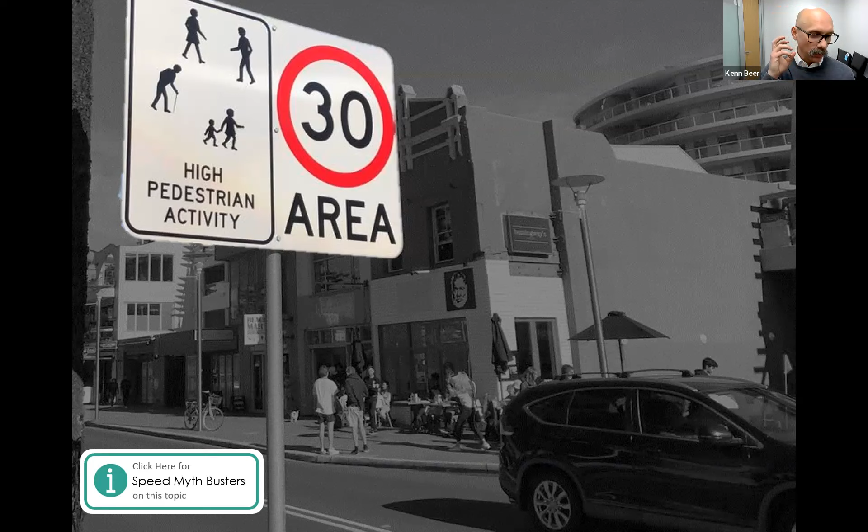Anyway, so back to speed now. Max was talking a little bit about some speed fundamentals in terms of the impact forces at different speeds, but also reaction time, braking distance, and the power relationship between speed and injuries, so that it's not a linear relationship.

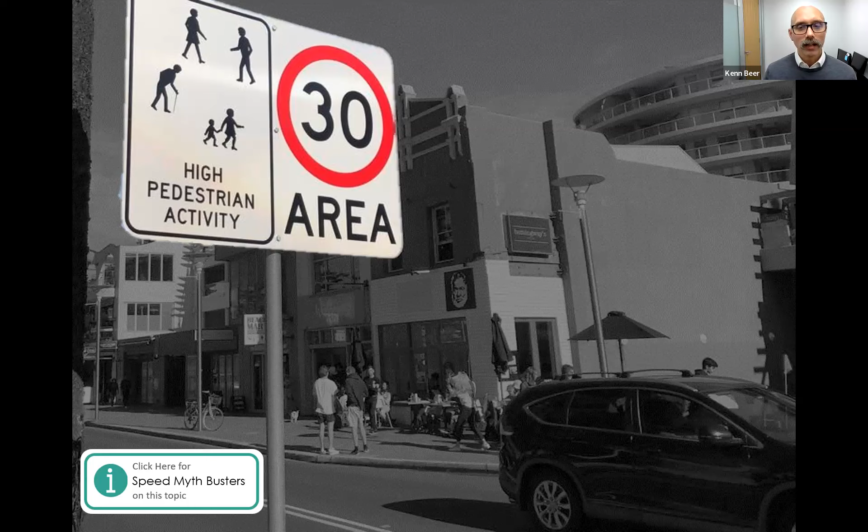We know that speed is hugely important, but it's very, very challenging, especially if we're talking speed limits. Using infrastructure like local area traffic management, or other features on the network that have physical characteristics so that people slow down as they approach these areas by themselves - it's their choice to do that - they are very effective. Speed limits can be effective too, but they come with a whole lot of challenges, and we have a very big reliance on the drivers themselves actually complying.

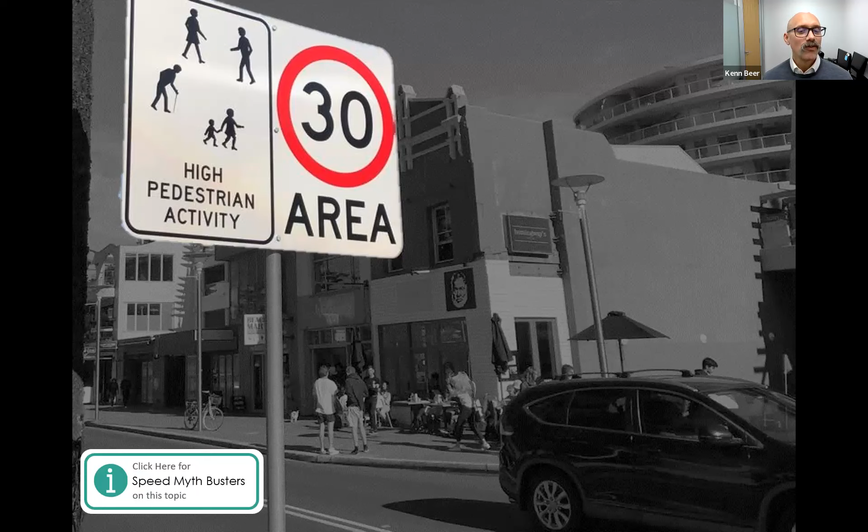If you put a speed hump in a road, you can have whatever speed limit you want, as long as the driver knows it's there, knows it's coming up and is fully aware of it, they will slow down. So it's very, very effective from that perspective.

So we know that you can achieve safe travel speeds through infrastructure and or speed limits. I encourage any way you possibly can to use infrastructure as much as you can, because of the challenges that come with speed limits. Speed limits are very important, but we need to be really coordinated and targeted about how we go about speed limit management.

I think we've completely got it wrong in Australia in terms of speed limit management in the past, and we need a reset. But you're taking a whole community on board, you're taking the politics into account, you're taking all sorts of other very complex things, and they intertwine, and it's really, really challenging.

I had the pleasure, or the displeasure maybe, of managing speed zones in Victoria for a handful of years, and all of speed limit policy and everything like that, and have worked on speed zone policies across Australia. And yeah, it's very complicated. It sounds easy, but the more you get into it, it just becomes incredibly complex.

But happy to share lots and lots of research and documentation, amazing studies, if anybody's interested in that level of holistic change in speed zoning and speed zoning practices.

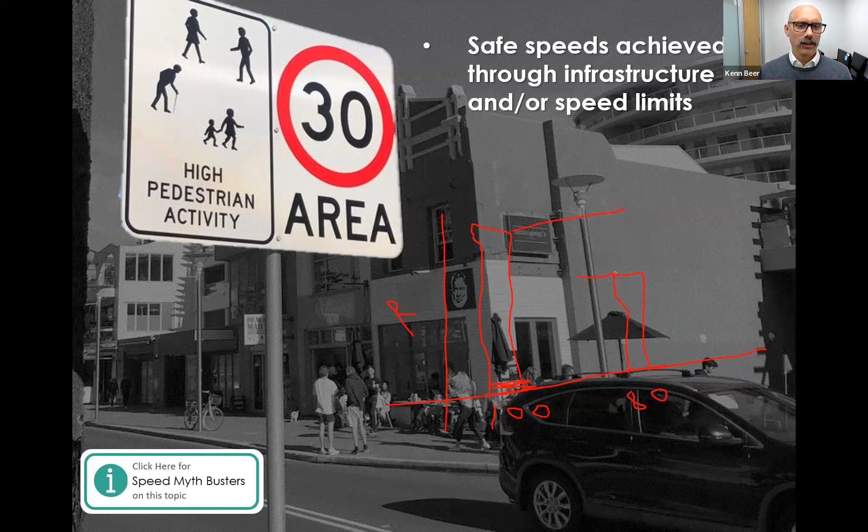Okay, but the issue we have a lot with speed zones and speed limiting is that we talk to the individuals like they're a collective. And we say, oh, we're reducing the speed limit on this road from 100 to 80 for safety, for your safety. They're like, what? I've been driving this road for 40 years and I've never had an issue. What are you on about? And I don't blame them at all. That's very low risk to very low risk for them as an individual.

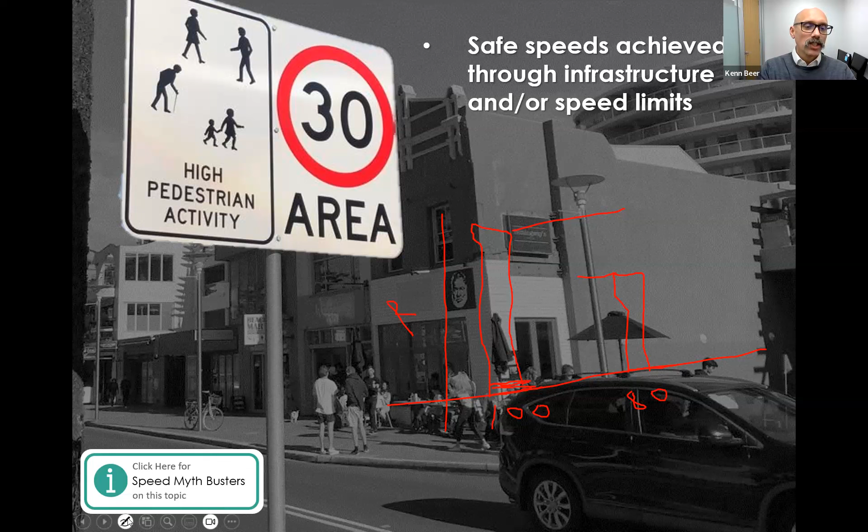So anyway, I think we need to think about the way we talk about speed zone changes. The science and the theory on it is unquestionable that a lower speed limit on a road improves safety. I was rewriting the Austroads Guide to Road Safety Part 3, which is speed limits and speed management, and I just put in there 30 studies—before and after—of roads where the speed limit had been dropped and safety had improved, and roads where the speed limit had been increased and death and serious injury increased. There's so much information out there to back this up, but it comes with those challenges.

Okay, so I think, Marissa, is it? I see chat activity happening. Yeah, we have a couple comments or questions.

The latest version of the speed zoning guidelines in Victoria has introduced risk rating as a reason to reduce speed limits on open roads. So this is a much better way to move, and certainly a risk rating system like iRAP, this infrastructure risk rating, or even utilizing AusRAP, ANRAM, any of these ways to assess infrastructure for risk, and then apply appropriate speeds, is very good.

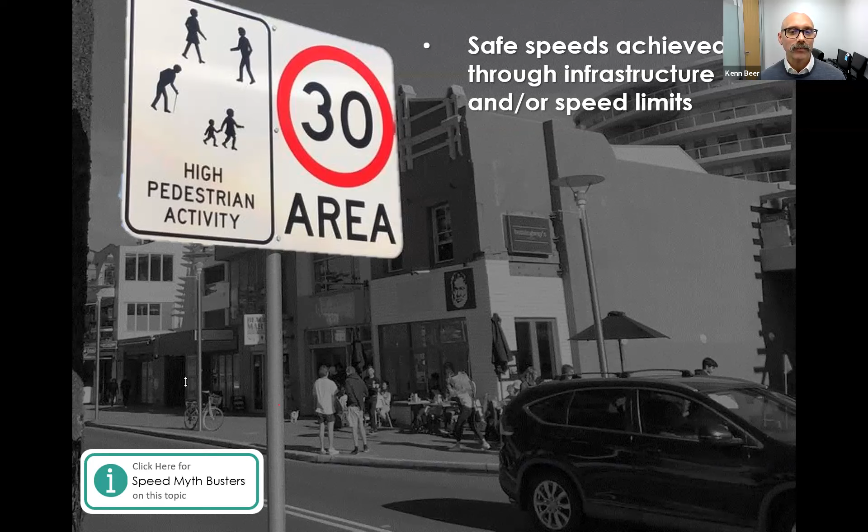But it's a fair use of my argument back against me, so well played. The basics around theoretically managing speed zones in an area is to have a default low speed limit and look at the roads that have appropriate infrastructure and raise the speed on them, and that should go across all traffic volumes. Naturally, you'll put your better infrastructure into the roads with higher traffic volumes. But yeah, boiling down major complexity to simple statements.

Anyway. Thanks, Kenn. We have a comment.

Freeways are supposed to be safer roads, but paradoxically also have more crashes - obviously a factor of high volumes, thus the collective impact. Yeah, and that's right. This is a nice lead into how we do a safe system assessment, because we factor exposure in with likelihood and severity, and we come out with risk levels at a collective level. I'll talk more about that, but Andrew's hit the nail on the head there.

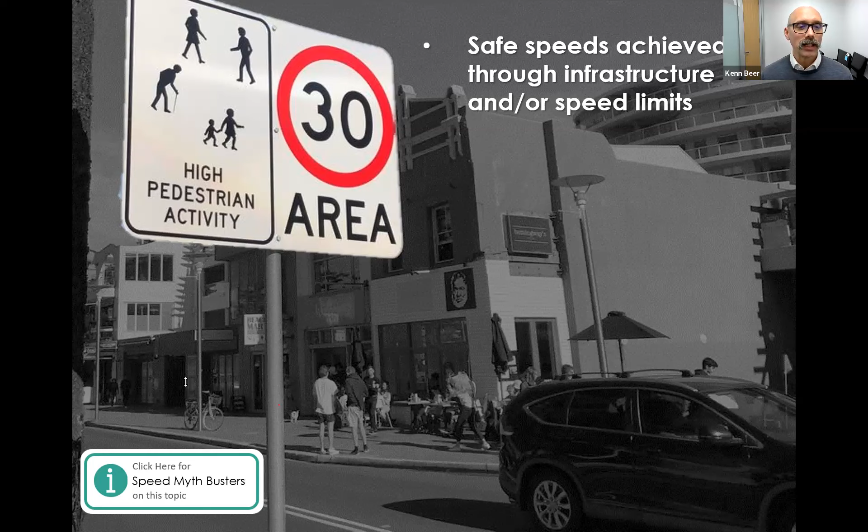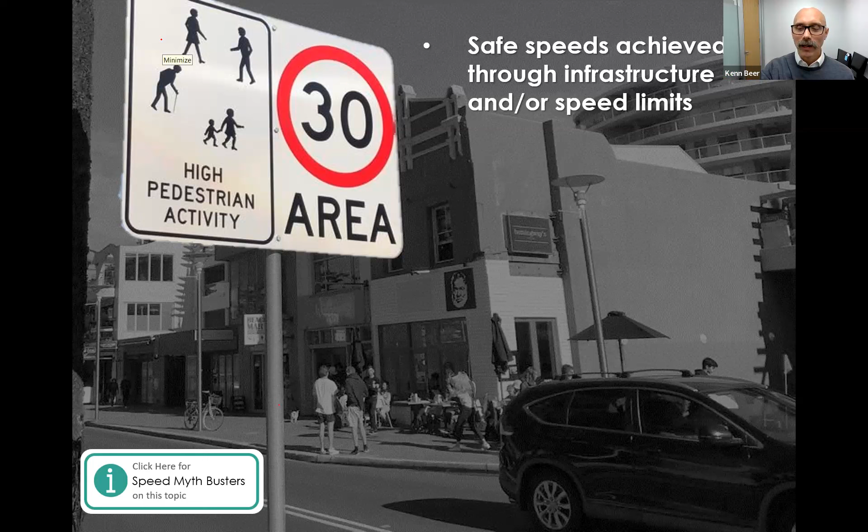And yes, Ross is madly working hard to try to get us safer speed zoning across Victoria, and yeah, we're making progress. I better keep moving. Thanks.

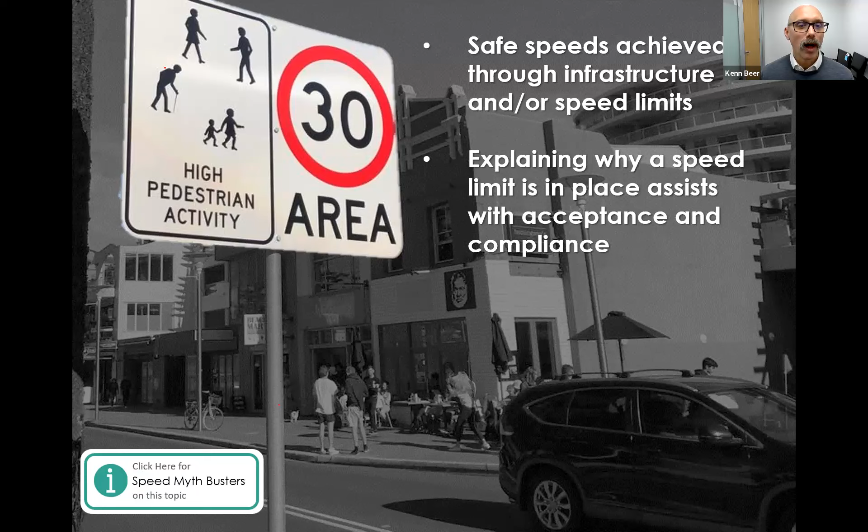Just a couple of little things I think are interesting. Generally explaining why a speed limit is in place assists with acceptance and compliance, especially around vulnerable road users. People will grumble, they'll always grumble at it, but when it's very clear why a speed zone is in place, it's better accepted.

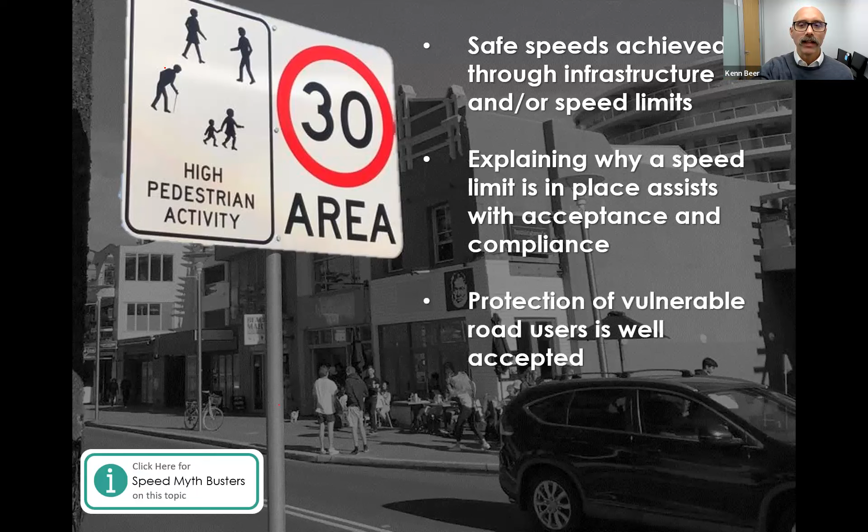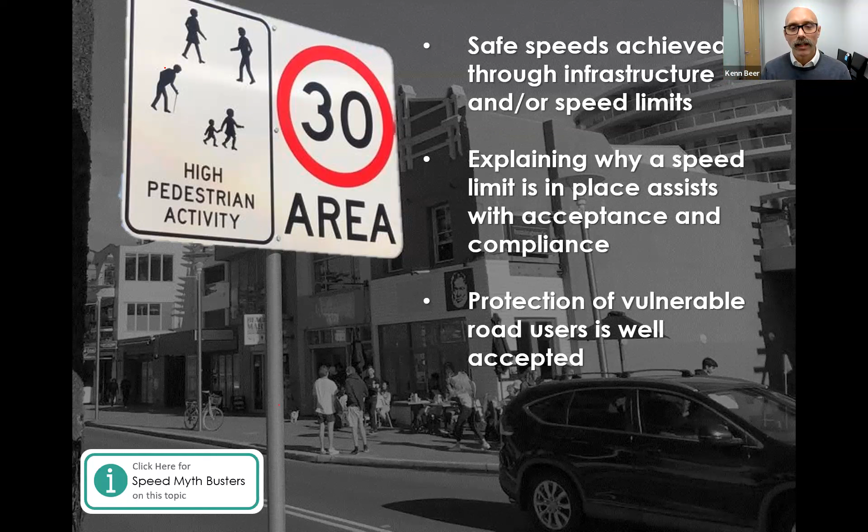And vulnerable road users, as I said. I actually think speed zoning in urban areas, we have a lot more ability to make changes with good justification around livability, increasing active transport, health impacts, noise, all sorts of good things - there's a lot to play with. Rural areas, it's more this safety versus mobility aspect, and I'm always trying to throw in other factors, be it fuel consumption and resulting tailpipe emissions, protection of wildlife, noise again, you can sometimes latch onto. So try to look for more levers.

Variable speed zones, though, for me, should be increasing and playing more of a role, because I see them as a way to start accepting lower speed zones, because it's trying to tailor it at a specific time of day and time of risk. I said time of day, but that's because there was risk at that time of day more than at other times.

But certainly the rural intersection speed limiting - it's got more names than any infrastructure I've ever heard, so side road activated speeds or the like - is where you've got the main road at a certain speed, but if a car's coming in on the side road, it'll trigger a lower speed limit on the main road. That to me is a beautiful way to get people more accepting of some of these lower speed limits, and it's good use of technology. We'd like to see that spread more across Australia, and it might be that in your safe system assessments you're recommending these if you're in a jurisdiction that hasn't used this, and you can push people into trialing some things and a bit of innovation.

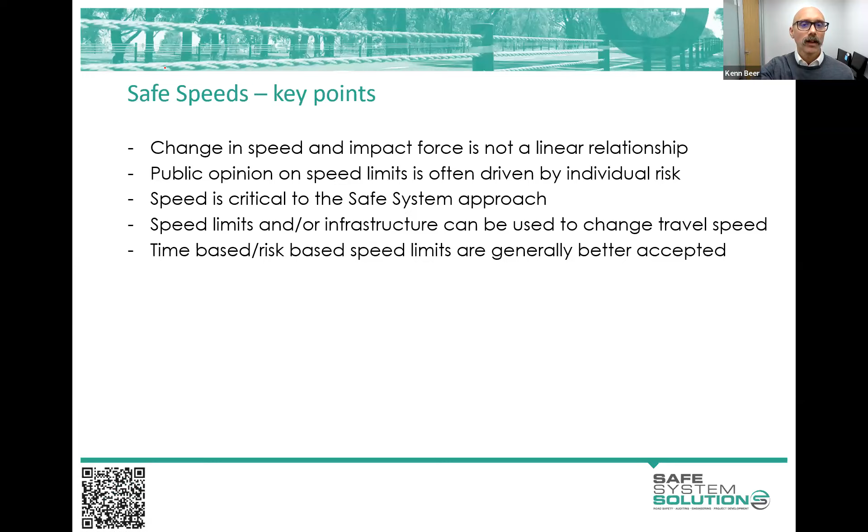And there's the key points in there which you can look at in your own time, because you've got the PDF notes which you can download from the learning management system.

Right. Now, let's give a prize if somebody can give me the international definition of risk - the international formula for risk. I wonder if anybody's got that at their fingertips.

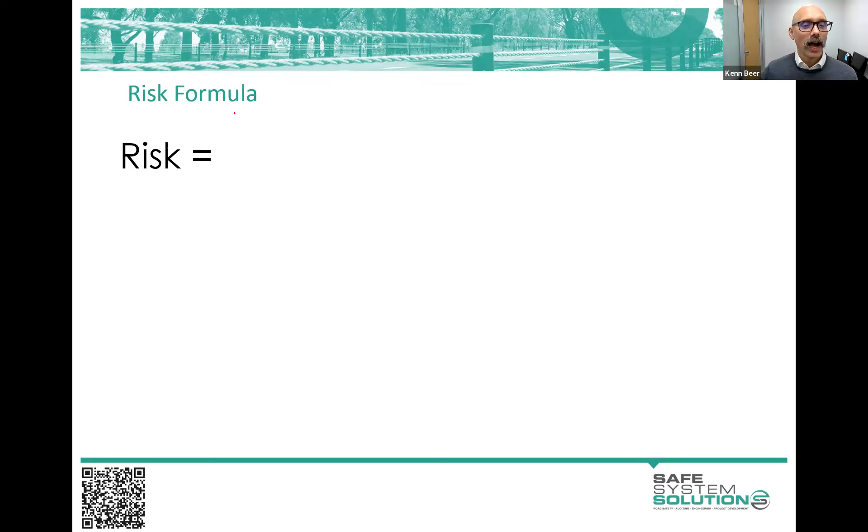Pause and see - Andrew's gone next level and given us the safe system assessment definition formula for risk. Probability times severity will do as that one. So you better give a prize for two here - likelihood times consequence, but I'll also take exposure times likelihood times consequence, or likelihood times severity, or probability times severity.

So it's what is the chance a crash is going to happen and how bad is it going to be, right? But this is also like economic risk - what is the risk of recession? Well, the risk of recession is what is the chance we go into recession, and then what depth of recession are we going to go into? That's the risk of recession.

So recession's a bad one to use there because it has a particular - or health risk. What's the chance of a disease, and then how bad is that disease when it goes out there? Is everybody just going to get a light cold, or are we going to have large swathes of our population dying? That's the risk of that disease.

So we use that in road safety. We've used it for a long time. We've said, what's the chance of a crash? And then when it does happen, what's the severity of that going to be? We've often, as an industry, really just focused on the likelihood one in road safety.

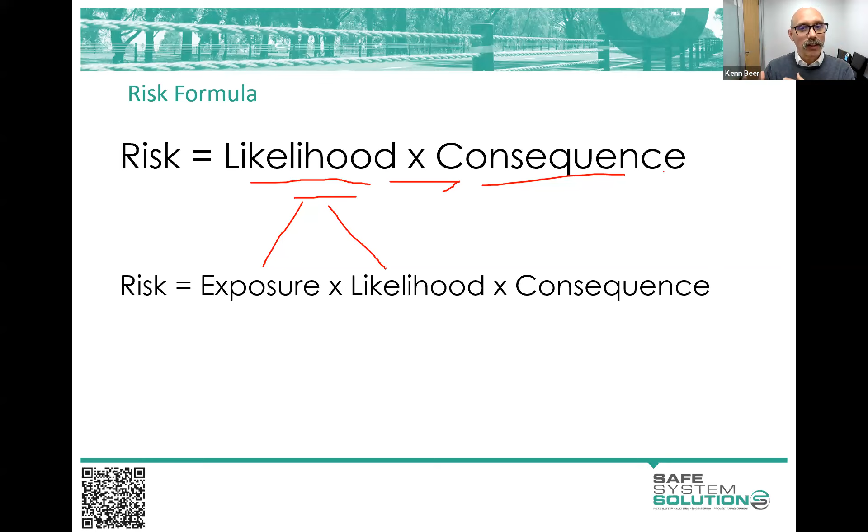And consequence stays as consequence, because you're putting yourself in a mindset that the crash now is happening and we've got to work out how bad it's going to be. So to do a safe system assessment, we actually quantify the exposure to crashes, the likelihood of crashes, and the severity, the consequence of the crash. We put a number to it and we get some numbers out here.

And that's what we're going to be building to, and then we're going to get you out there looking at the road environment and analysing - well, what's the exposure to crashes? How many road users are exposed to crashes here? And then what's the chance that they're going to crash? And then how bad are they - what's the severity of injury when that crash happens?

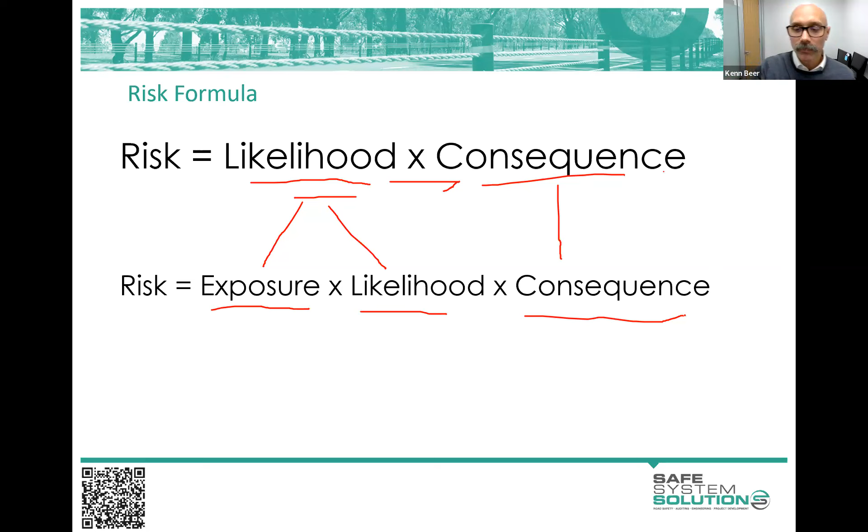So just to help you get this clear in your mind - exposure, likelihood, and severity - I'll show some treatment examples where we look at what's influencing the exposure to crashes, or the likelihood of crashes, or the severity of crashes. Take note here, because your assignment at the end of this module, we're going to ask you to look at a bit of the road network and think about what's influencing exposure to crashes, what's influencing the likelihood of crashes, and what's influencing the severity of crashes.

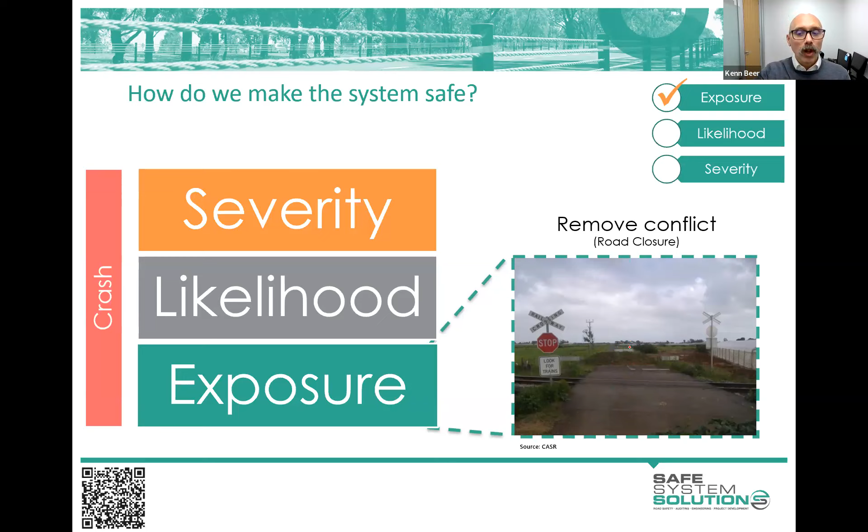So closing a road, an intersection or the like, you eliminate that exposure. But likewise, if you physically separate - and I'm talking about physical separation here, not just a white line or a bit of curb - say we've got cyclists and pedestrians physically separated from an elevated structure with all the cars, they're not exposed to crashes with passenger vehicles. They might be exposed to crashes between each other, like cyclist to pedestrian, but not vehicle to cyclist or pedestrian crashes. So those are examples of where we've addressed exposure.

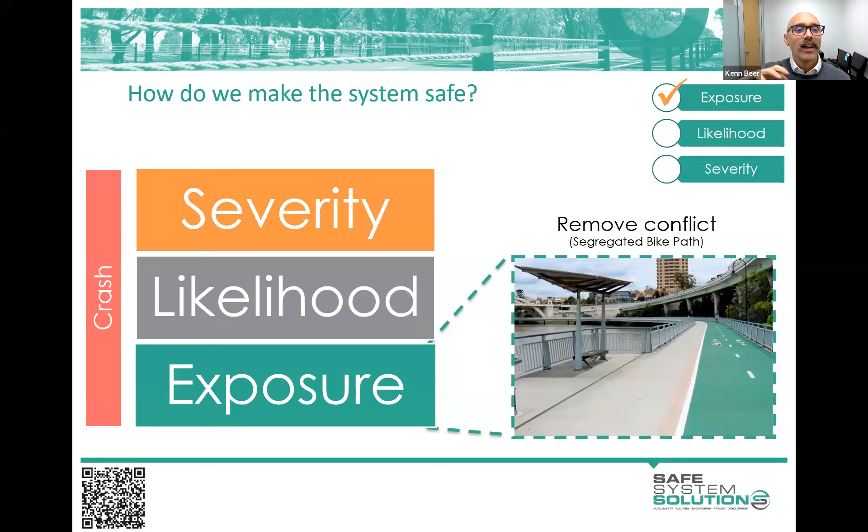Now, likelihood of crash is influenced by a lot of stuff we've done for a long time in road safety, like line marking, sealed shoulders, good pavement, lighting, some newer things like wide center lines, audio tactile edge lines, RRPMs, even just good geometric alignment of a road is a likelihood factor. These are all things trying to stop people crashing in the first place. Let's do everything we can to stop people crashing.

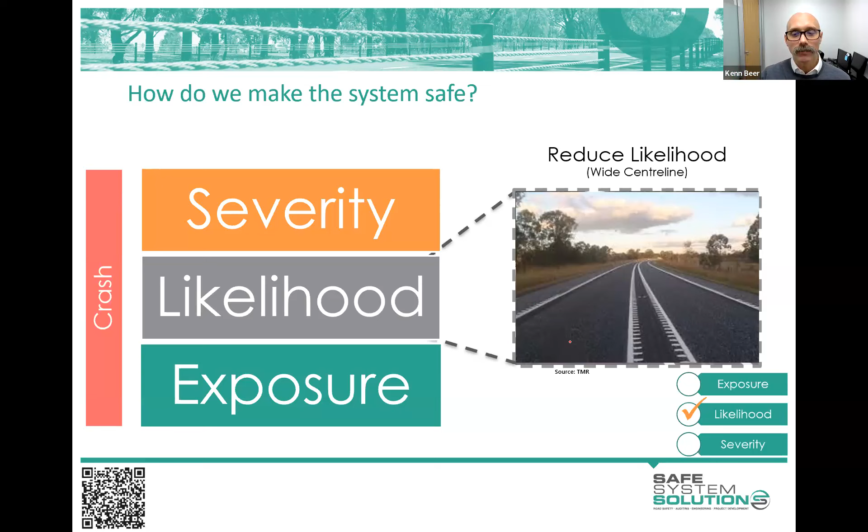Even traffic signals themselves are a likelihood factor. We reduce the likelihood of people crashing if we signalize an intersection compared to a passively controlled one, like a give way or stop sign. They're less likely to crash because they're getting a clear indication: you stop now and you go now, and vice versa. But if somebody decides not to take that advice, or misses it completely, or is distracted, or is half asleep...

...the severity of the incident is just going to be as bad as it was before, because we've got the same speed and the same crash angles - the severity is just as bad. Now there will be some cases where the severity is down because they've slammed on the brakes late and go into the intersection slower, but we still have abundant capability for high severity crashes to occur at these signalized intersections. The feature of the signals itself does reduce the chance of crash.

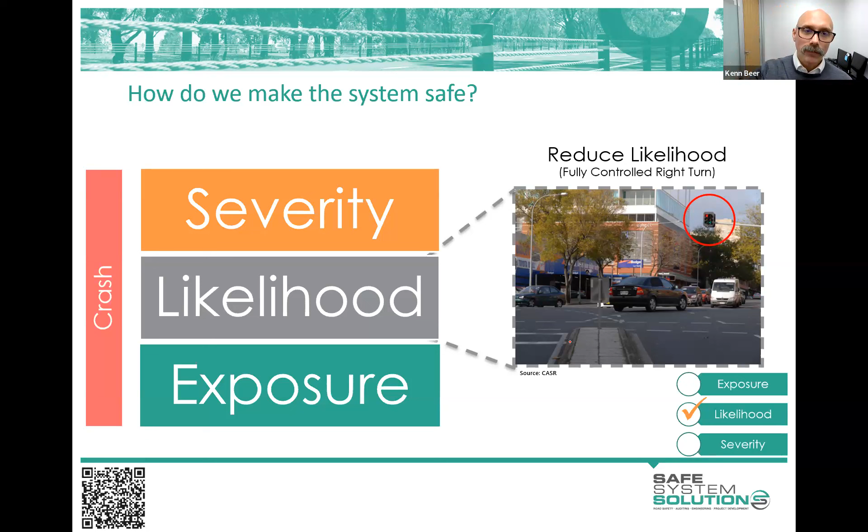Then we talk about severity. We only have a small handful of things that can actually substantially change the severity of crashes, because we're down to the physics and biomechanics of injury here. What we've got to play with from a road design and management perspective is the speed of vehicles, the angle of impact if we're talking vehicle-to-vehicle crashes - the angles they hit and the types of crashes that occur.

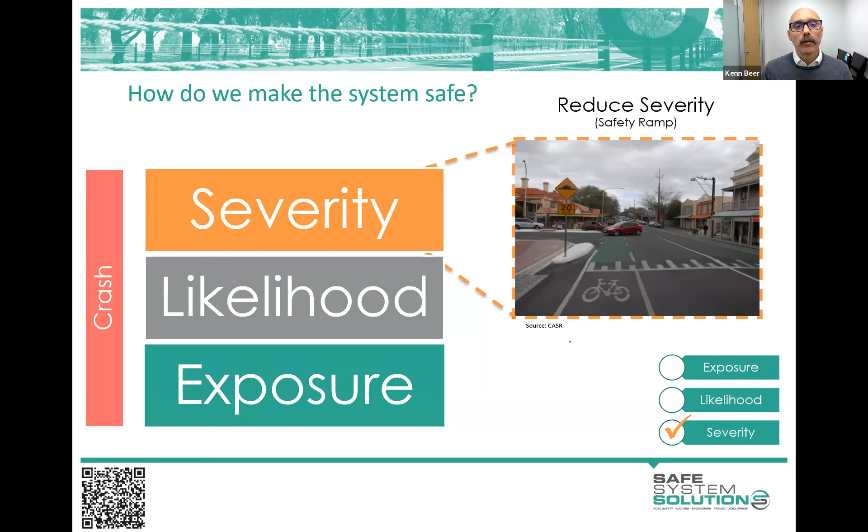So we've got speeds, angles, and the types of users you're letting into these areas. If we have pedestrians, the severity will be much higher compared to vehicles, so there's that sort of interplay. Sometimes we also have the ability to implement features that manage energy, and that's particularly what they're designed for, such as barrier systems, crash cushions, impact attenuators, cushioning devices.

Barrier systems are a really good example of a severity reduction device, because if a vehicle leaves their lane and hits this barrier system, that is a crash, but we know the severity of that crash will be low. Without the barrier system there's a fair chance they would go into the other lane - there wouldn't be any other vehicle, they'd come back, they'd drive on, there wouldn't be any crash. So actually the installation of a barrier system increases the likelihood of crashes, but the severity of any crashes happening is so much lower because those products are designed to manage that energy.

So you can see, we have the ability to influence exposure, likelihood, severity, or combinations of all of it by choices we make with the design and management of the transport system. We can take human behavior almost out of the equation, because there are ways we can redesign the road for the bulk of the death and serious injury that occurs. There are practical challenges with funding and getting community on board, but from a pure design, engineering and management perspective, we can do a huge amount in reducing death and serious injury.

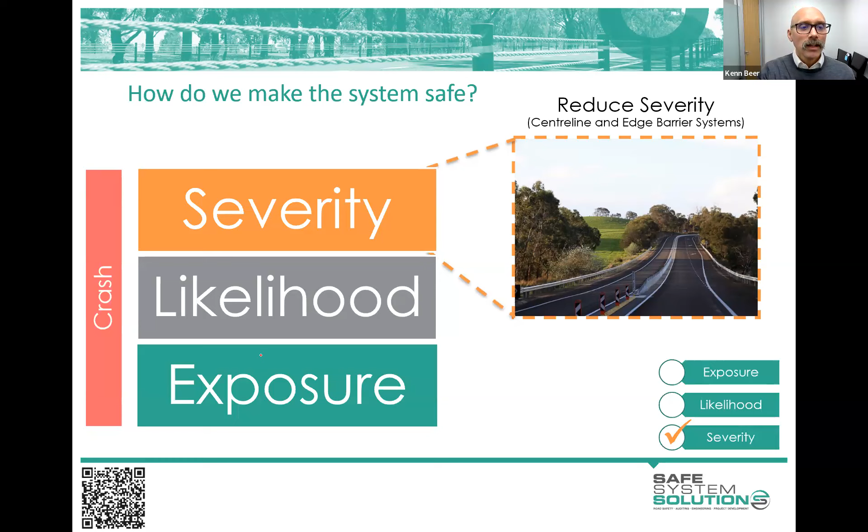We have one question at the moment. Could a motorist miss a safety ramp just as easily as a traffic signal, while also introducing a vehicle stability issue if hit at speed?

Yeah, that's a really important question, and it's asked by a lot of people associated with raised platforms and the like. It's very much been proven that that is not the case, and people do not miss raised platforms. There's some requirements though - they need to be marked well, they need to be lit, and they need to have some advanced warning signage if you want to supplement. But the evaluations done on raised platforms in lots of different road environments show they are extremely successful, and people are not hitting them at speed.

Well, anybody who's hitting it at speed seems to be fully aware that they're going to hit it at speed. So it's rare that somebody has decided to go - I mean, we're talking like police chase type scenarios. But it's a good question to ask, and I'll show you a few things around that a little bit later in this module. So thanks, good question.

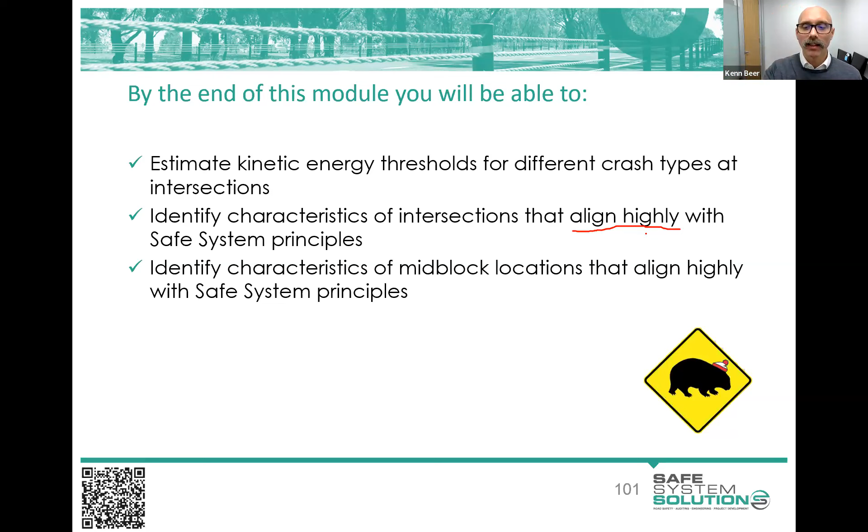Now, conflict points - if you draw a line of travel path and two road users cross that travel path, that's the point where the crash can happen. There are conflict points, okay?

But there's another reason why risk goes up at intersections, and that's associated with secondary crashes and avoiding crashes. So as a vehicle approaches an intersection, another vehicle could enter that intersection, and then the vehicle will try to avoid, as you naturally would. If you're driving along and approaching an intersection and somebody pulls out, you're going to try to avoid if you can - and then vehicles leave the road.

And they may clip the other vehicle, so you've got these secondary crashes that are occurring. And we also put point source hazards all around intersections.

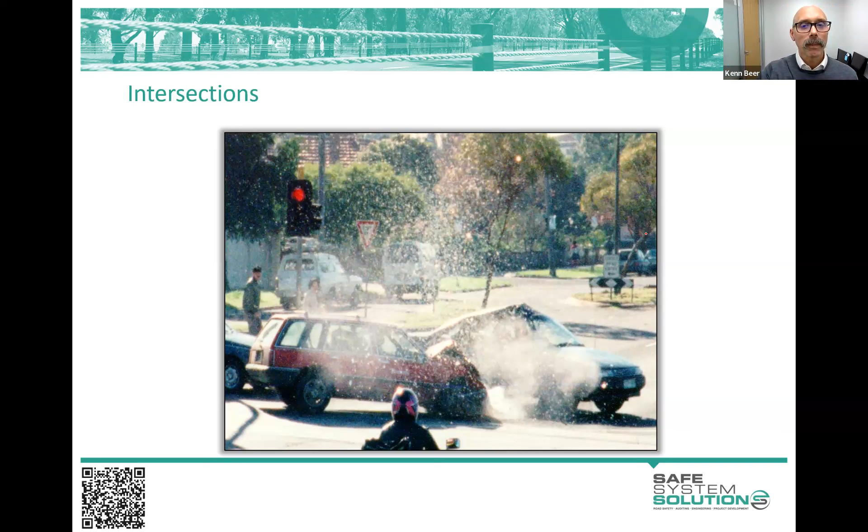Then we look at the chance of a crash through conflict points, and minimizing conflict points, maybe left in, left out, or closing off a turn or the like. And then we've got all of the severity stuff, managing the energy using speeds and angles to try to lessen the energy of any crash.

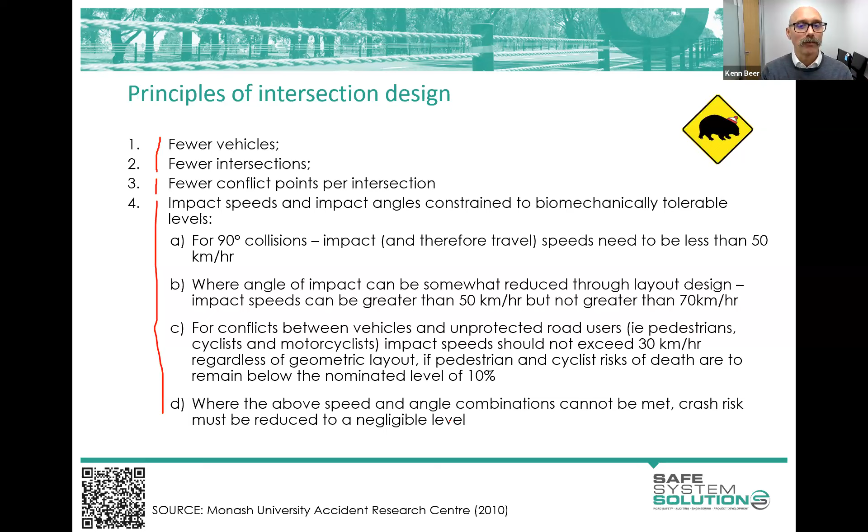You can see there that they've placed these within those safe system tolerances that Max talked about last session, and the speeds you'd expect your community to survive at in different crash types. I won't read through them all in detail because I think I've got a couple of tables which make it a little easier. But you can see there...

I'm starting here with passenger vehicle to passenger vehicle crashes, okay? So for now, we're just going to put pedestrians and cyclists aside—maybe we're thinking about rural environments here. We will talk a lot about pedestrians and cyclists at intersections and how to get our best safe system alignment there. But for passenger vehicle to passenger vehicle, we can generally have all crash types occurring where we have a speed differential of 40 kilometers an hour and expect our community to walk away from that crash, or just have minor injuries—we don't want it to happen, but it's generally survivable.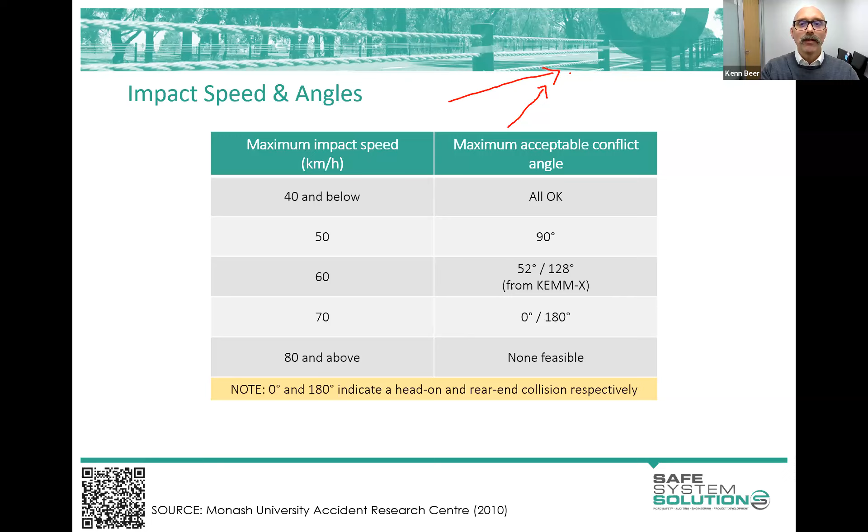And it gets up to that 50 kilometers per hour for that right-angle impact. If you get more angle on the crash, you can go up to about 60 kilometers per hour where we're still generally thinking it's quite survivable. So if you can have your crashes occurring at these angles, okay, a lot of the energy is dissipated out into the environment because the vehicles kind of bounce off each other a bit, and it's a more survivable crash, up to around 60 kilometers per hour for that.

70 for your head-ons, and 80 is really talked about as not feasible—you cannot operate an intersection with an 80 kilometer per hour delta V.

And it's important that I talk about delta V, which is change in velocity, because you can operate an intersection at very high speed if you want, but you need to accelerate vehicles so that their differential speed is within tolerable ranges. An easy example of that is like an on-ramp or something like that—you accelerate the vehicle up. So if they were to crash there, it can happen at 100 kilometers an hour, it can happen at 300 kilometers an hour, they can crash into each other—the transfer of energy in that initial incident is not enough to cause death or serious injury.

Now, if it's high speed, you've got to think about secondary crashes here, because people are going to run off the road, and then we're into major energy territory. But the actual initial crash is within tolerable levels.

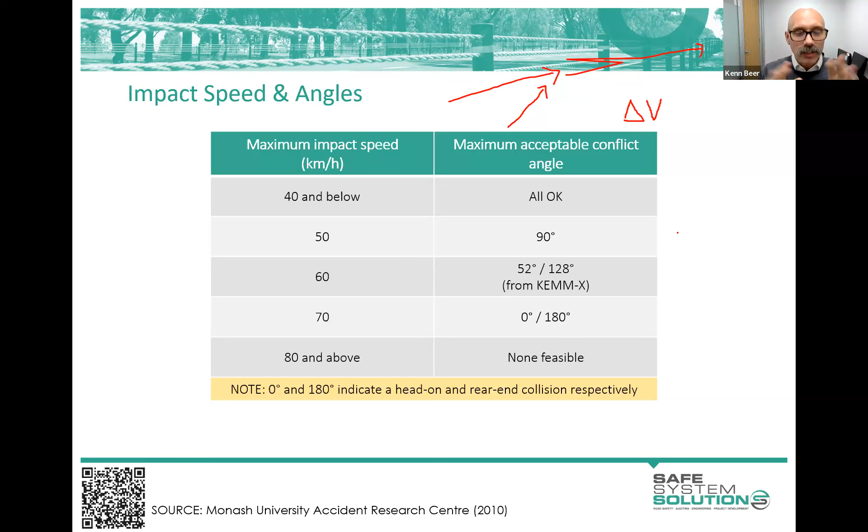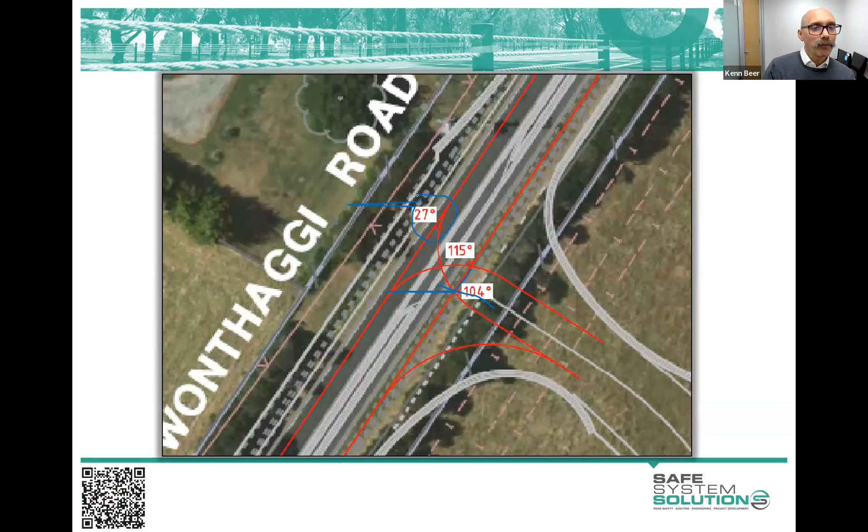So when you're assessing an intersection, you want to think about the angles of crashes and the speeds. Now, you don't need to be this precise, but when you're doing a safe system assessment, you can simply go: well, okay, a vehicle pulling out there and being struck by another vehicle—that's about a 90-degree crash, so we're thinking around 50 kilometers per hour bullet vehicle speeds, about what we're worried about. Maybe over this side, okay, there's a bit more bounce off, so we're up around the 60 kilometer per hour mark. So you're thinking about angles, speeds, and the vehicles involved.

And this is pretty much the equation we're starting to think about for how bad that crash is going to be when it does happen.

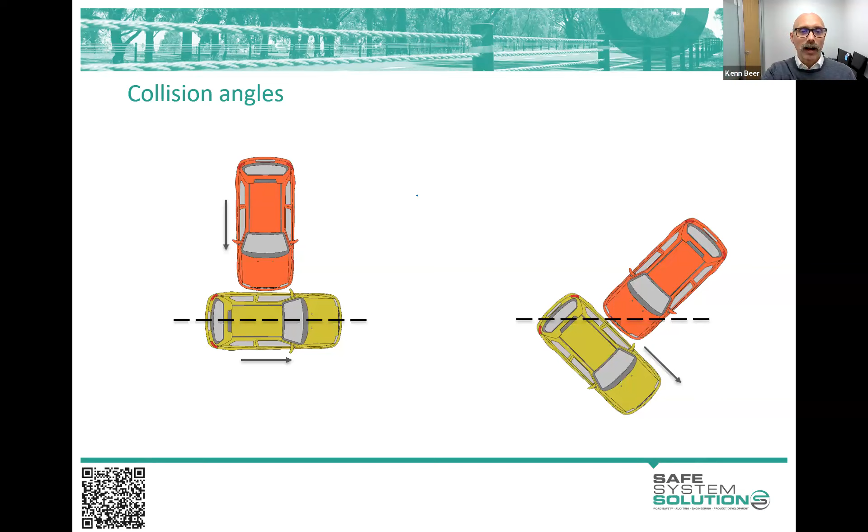And I talked about the secondary crash impact. We want to think about that, and about vehicles leaving the road at these intersections and what's around them. The Centre for Automotive Safety Research at the University of Adelaide did a big study into secondary crashes at intersections, replotting all these intersection crashes onto the same axes: vehicle crash, secondary death and serious injury, striking objects, rollover, all of that in these areas. Probably pretty obvious, isn't it? Do we need a big juicy academic study to tell us that? Probably not, but nonetheless, it's there.

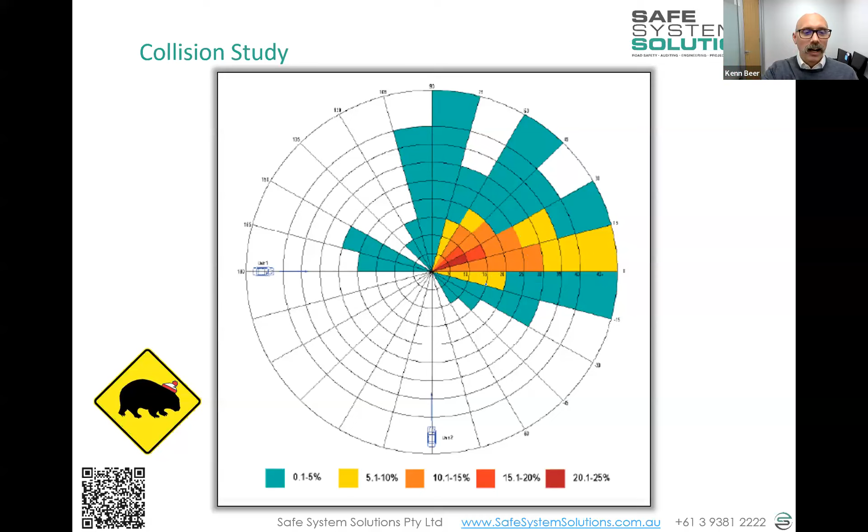Okay, so I'll pause there before I introduce this exercise and see if anybody needed any clarification on that.

We have a question from earlier: how do we instill safe system thinking to external parties when their thinking is more based on capacity requirements, for example land use development?

Interesting big question to ask. I first of all would say that I actually believe we can get safety to be more of a marketing tool than we currently do in development. I think there's a sales pitch to a safe development that is underutilized. It's similar to ANCAP star ratings of cars - what sells a car? The faster it can go, the more cup holders, the color, whatever other feature it had. Volvo would occasionally talk about their safety features, which then was some sort of fringe weirdo who bought a Volvo for safety. But ANCAP proved that you can actually leverage a huge market on safety, with people demanding and wanting safety and buying for safety if you frame it in the right way.

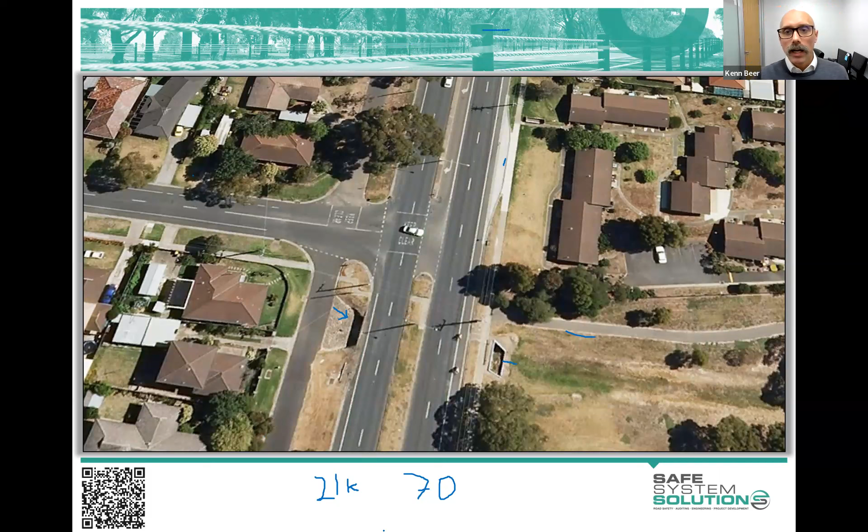So there's a shoulder which kind of doubles as a bit of a bike lane as well.

Okay, so your task here is to eliminate fatal and serious injury crashes. I'm going to give you an extra $1.5 million because I like you. You can have $4.5 million to eliminate death and serious injury at this location into the future.

So, some things: you can't close the intersection off, and you've got to leave access for people to come out and turn right, to turn right in, and to come out left and go in left as well. So we need that full access for vehicles.

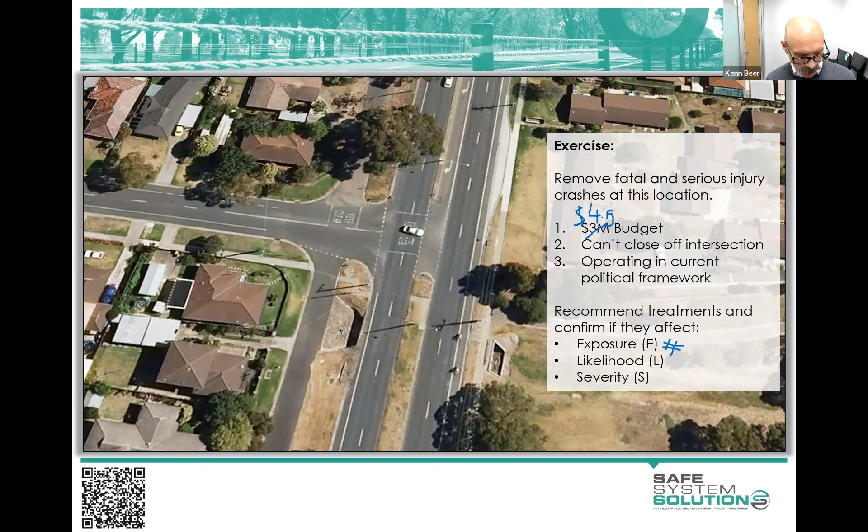I'm not sure if that's a question, Damien - are raised platforms on 70k roads outside guidelines? I'll talk a little bit about that in a bit, but that's up to you for this stage if you want to look at that. And if you do, tell me if it's going to influence exposure, likelihood, or severity. All right, see you all in 7 minutes.

How much do the variable speed systems cost? Well, for this site to do something along those lines, we go 485,000. For now.

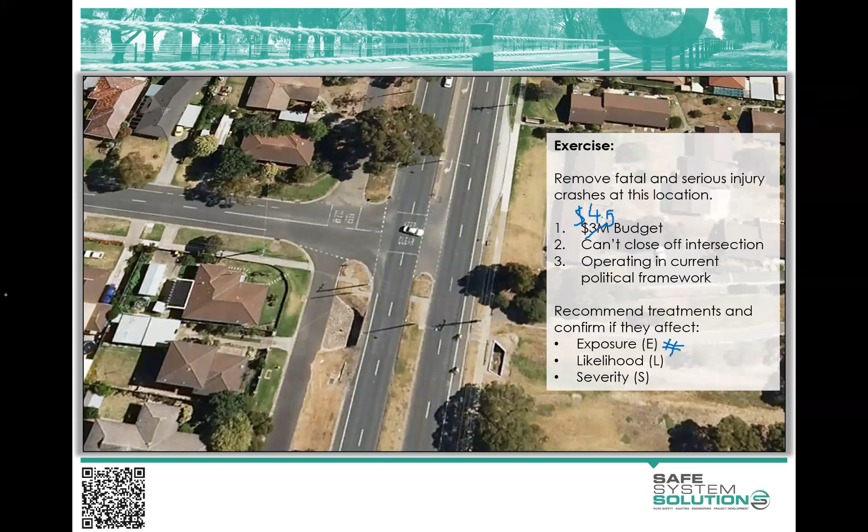Okay, let's make sure we all—wow, some good answers coming in here. I'm going to give it a minute before I start talking through. I'm going to read through everybody's answers while I can.

Put in exposure and likelihood and severity. I'm seeing some really in-depth answers coming in, but I'm really keen on exposure, likelihood, and severity categorization for everything.

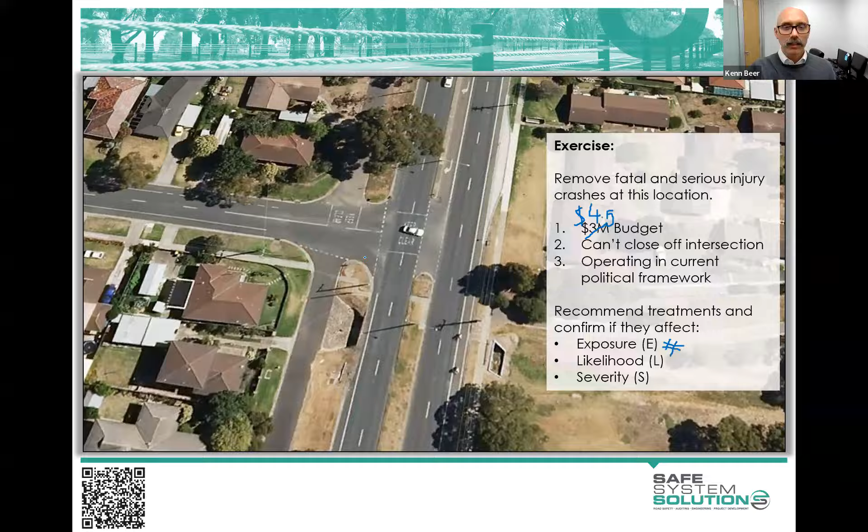So there's a lot of other good stuff. I'm not going to get through everybody's in terms of talking to them. I've read through as they're coming in, but I might talk a little bit about this in a slightly different manner. I'll come back, I promise you, and I'll talk more about that specific intersection, but I just want to clarify a few of those things that people have been putting in and make sure we're all on the same page.

And in fact, we know that signals give us about a 45% reduction in death and serious injury compared to a passively controlled give way intersection at a location kind of like that one. So we know we get some good benefit there, but we've still got a residual there of 55%.

It's interesting when you overlay that and look at death and serious injury across any major or even medium-sized cities, we see that the highest intersections for death and serious injury are signalized intersections, and large signalized intersections. Here's a heat map of death and serious injury of just a little bit of outer metropolitan Melbourne.

I could have really picked it anywhere - Geelong, Brisbane, Canberra. It's when you've got roads where the speeds are up above 60 and above, the major arterials and the intersections of those major arterials, and even some of the side roads as they get more volume - these are signalized intersections. That's where our community is being killed and seriously injured at intersections.

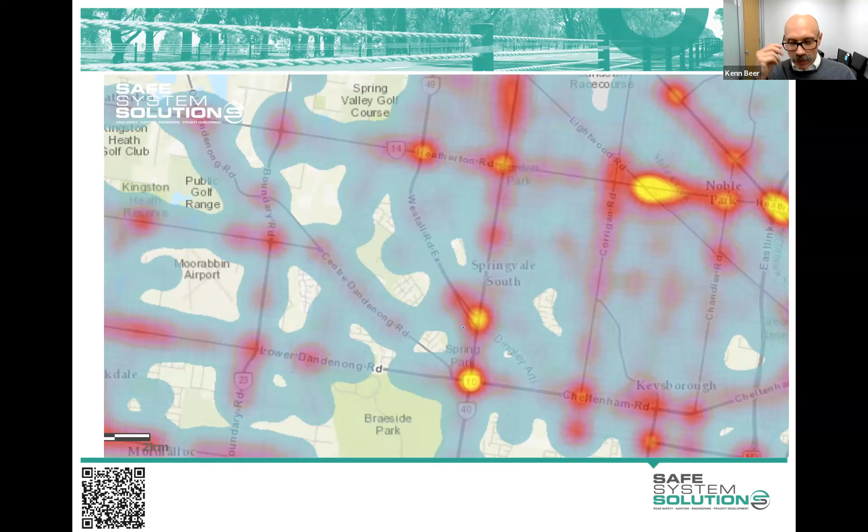Professor Jeremy Woolley from the Centre for Automotive Safety Research at one point in a national forum said traffic signals are the biggest failure of traffic engineers. He meant it in the sense that traffic engineers just love getting those signals in, and then everything else - like after it's got mast arms and LEDs and speed camera, red light camera and the like - any death and serious injury there is just the individual's fault.

But how many times can we build new signals and expect we're going to get some different result, but we don't? We just continue to see the residual death and serious injury. It's time we've got to start questioning that process and what we're just rolling out.

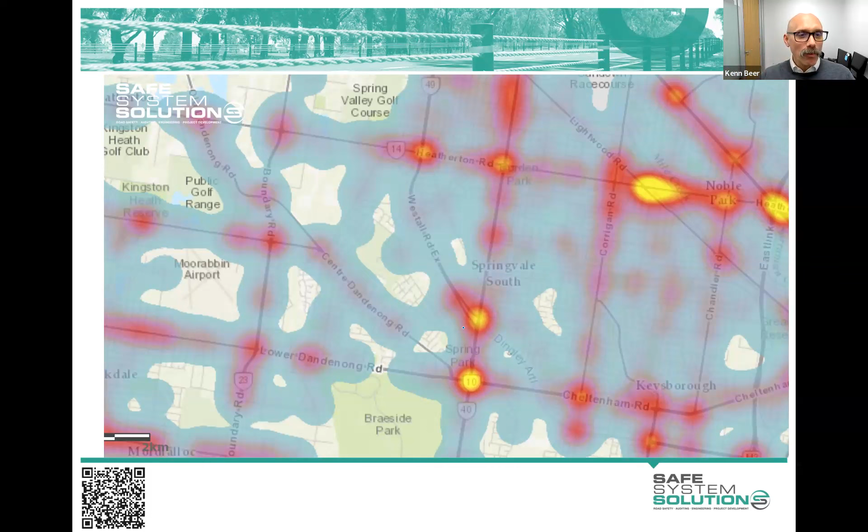So, better than a give way sign, but by no means safe. A roundabout, on the other hand, is much better aligned with safe system principles - passenger vehicle to passenger vehicle we're talking about here. And it's because we're addressing the severity of incident.

Now, I said 45% crash reduction factor for traffic signals. We can be somewhere in the 80% when we're talking about roundabouts, depending on a few specifics of configuration and specifics of road users, but generally around that 80% reduction in death and serious injury. We have about the same number of crashes though - it's just that they're not as severe.

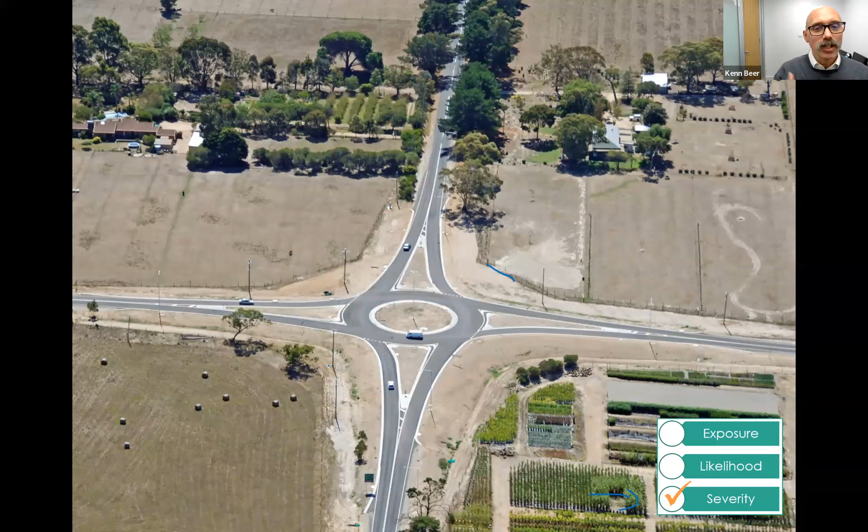But maybe we don't need to be as big with it - maybe we could go smaller. This is a very different road environment to what you were looking at, but I point this out for a couple of reasons. It's a funny little roundabout, but one of the biggest reasons we do see a really good safety benefit from these mini roundabouts in the UK is because of disruption of absolute priority.

What I mean by that is everybody approaching this intersection feels there might be a chance they have to give way - so they look around, they slow down, they're more attentive, they're alert. If we have a priority leg, and it can be even a priority leg with a green light - so an intersection signalized, you've got a green light, people are tuned out, they're going at the same speed, they're not activated in the driving task, they're just driving through. And so if that vehicle enters, we have high speeds, we have bad angles. Here, we're at least more alert, and often people are slowed down to go through there.

So disruption of priority is quite a good concept. I mean, the idea of a four-way stop, which is used a lot in the US, is a very well thought through technique, because you've got your point of risk and everybody slows down to come to it and then carries on through.

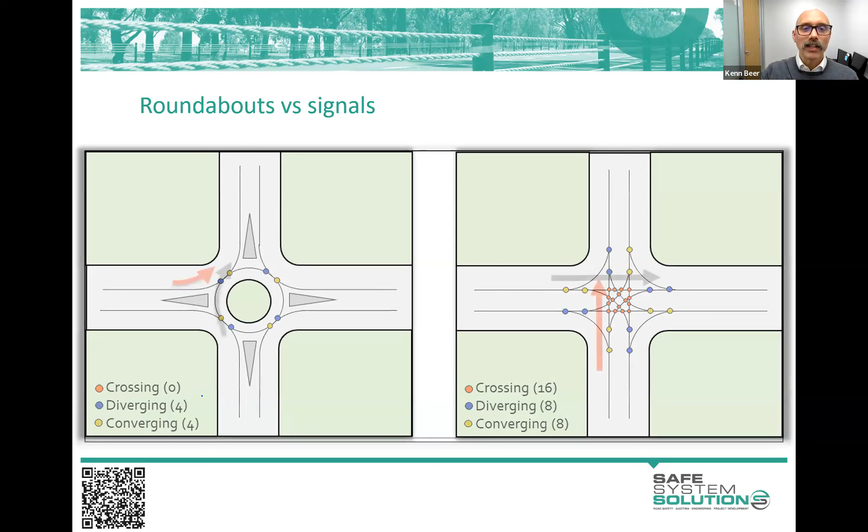In these rural roundabouts, or areas with very low pedestrians, we see a small number of conflict points at a roundabout, versus more conflict points at signals - ways that they can crash. The angle of crash is much better too. When people crash at a roundabout, they bounce off. When they crash at signals, it's a very harsh angle, crashing into the sides of vehicles.

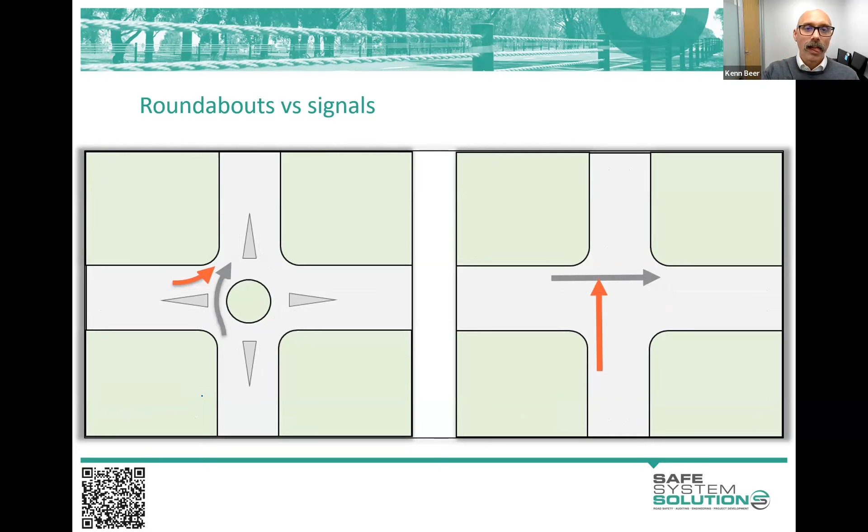As I mentioned, people are driving in all states of consciousness. Sometimes they're half asleep, they've worked a double shift, driven for 10 hours, or they're on drugs, or on their phone. There's all sorts of states of consciousness people are driving in.

You can get angry at that and push all the blame back to them, or we can start asking whether there are things we can do with the design of the road environment. Miraculously, a roundabout at an intersection brings drivers back to an active driving task - they're looking around, navigating, looking out for other vehicles, really involved. But at signals, you don't get that; a proportion of drivers are very tuned out to the task of driving through a higher risk spot on the network. So the roundabout activates the driving task at that point.

Jump into that, Marissa - I'll let you answer the question, but it reminded me of a memo I wanted to show when I was talking about this. I'm going to stop sharing and dig in to see if I can find something, if that's all right.

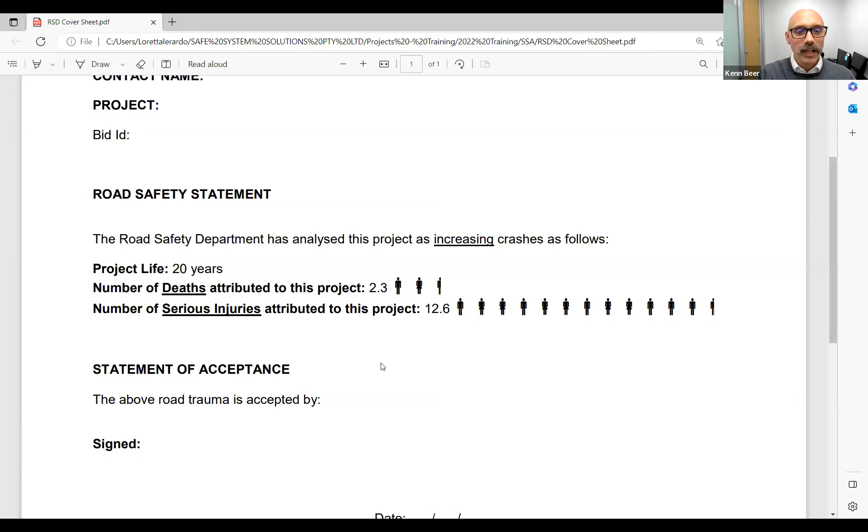And statement of acceptance, it's accepted. This road trauma is accepted by, and so that would go on the top of the memo with all of those other notes about the other bits and pieces, and sent back.

So the thing is, we know we're going to increase risk, and of course nobody signed it, and there were phone calls to the executive director, and then there was meetings and the like. I remember vividly this stern conversation of, the role of a road authority is complex, and you've got to manage many different things, and we've got an obligation to blah, blah, blah, blah.

I'm like, we know that, but okay, if we also know we're going to kill and seriously injure people, say that it's more important to get a bit more capacity out of the intersection, and that we will accept killing and seriously injuring people. Okay, and that's then the philosophy. Don't sign up to the safe system philosophy and then go, yeah, we'll do that if it's convenient. Anyway, I think you get the idea.

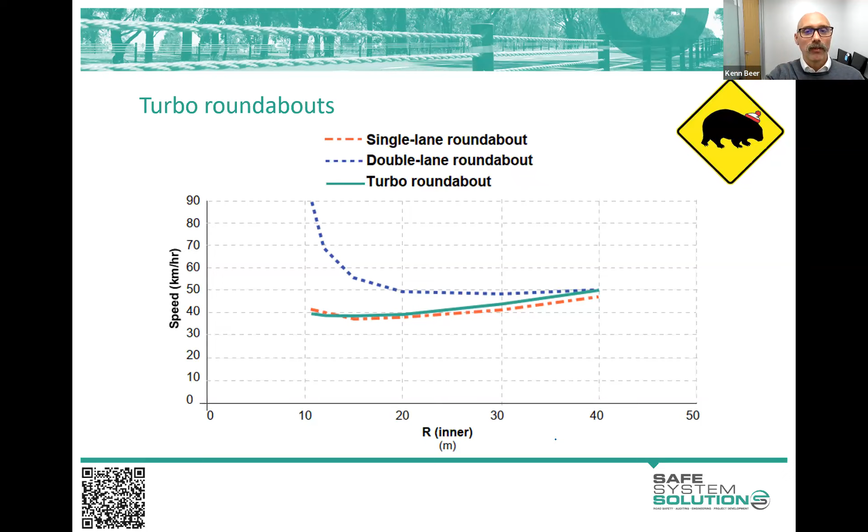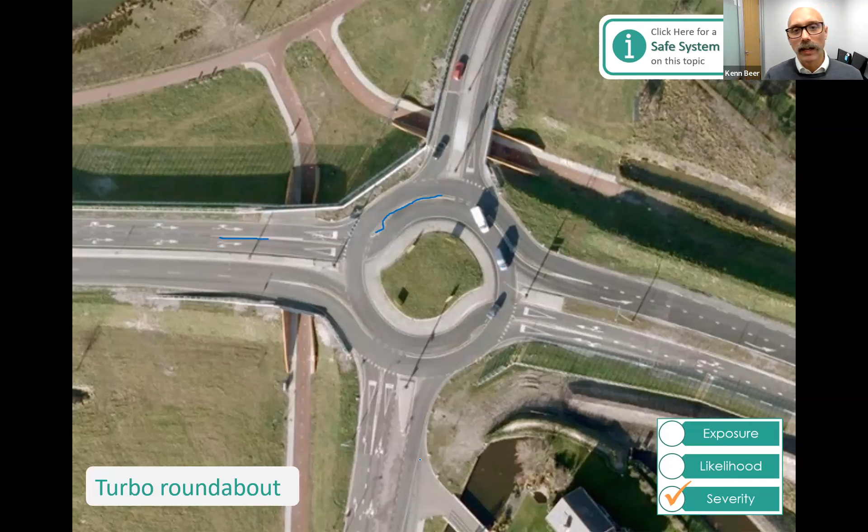I can jump through this quickly since it's more about adding interest. Somebody mentioned angle of crashes, and multi-lane roundabouts can be straight-lined through, so we lose a little safety performance. Turbo roundabouts I find interesting - they have raised concrete separators on the approach and circulating carriageway to stop straight-lining and reduce speed. If you want a right turn, you get into your channelized right turn area. They basically perform as well as single-lane roundabouts, yet they're double lane, so you get more capacity. It shows we can have safety and capacity - we don't need to trade one off versus the other.

I love this photo - the truck has come in, obviously made a mistake, entered the intersection. We've got this white van here, and I know it's going to be safe because they physically would not have been able to navigate this radial roundabout design without slowing down significantly. And if they do happen to hit, look at the angle of crash - it's beautiful. Just a beautiful example of safe system in action there.

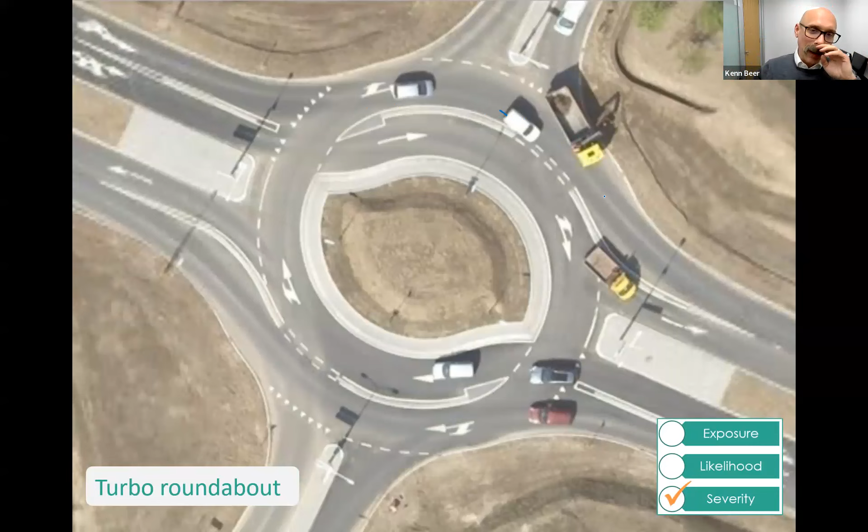I popped this up - we had a Dutch engineer we were traveling around with, doing cyclist work around the design of roundabouts for cyclist safety. I was talking to the Dutch engineer about this photo, and I said, well, this amazes me - in Australia, for roads with those volumes and where it is, this would be a large signalized intersection, maybe eventually grade separated, but still with speeds of 70 and 80 kilometres per hour, and we keep building them all the time.

The Dutch engineer, and this was 10 years ago, was absolutely dumbfounded - at what speed? What about all the death and serious injury? They would rather take more land and more complexity in order to keep speeds down at conflict points. Actually, I don't think this would be that complex on the ground, because you just follow your channelized area and it's signalized around the outside anyway. More than anything, it was the completely different way we look at the transport system - we have these high-speed, inherently dangerous locations where we push responsibility onto an individual to see a red light and stop, versus this, which is lower speed, not without some risk, but the severity is going to be less bad. The responsibility is still there to stop, but you'll find it very hard to do major significant damage to another vehicle and its occupants at this location.

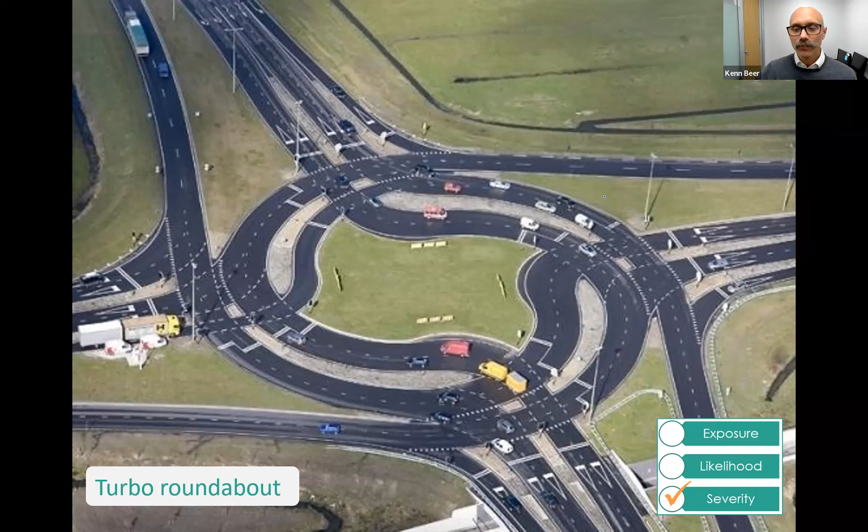It's interesting to see people trying to push how we can operate major arterial-to-arterial intersections with more safe system alignment. So what could we do? I like seeing some of these concepts come out - this is the cut-through. It hasn't been built, it's a concept, but you're trying to get different angles, trying to wake people up, giving them an activation as they enter an area of high risk.

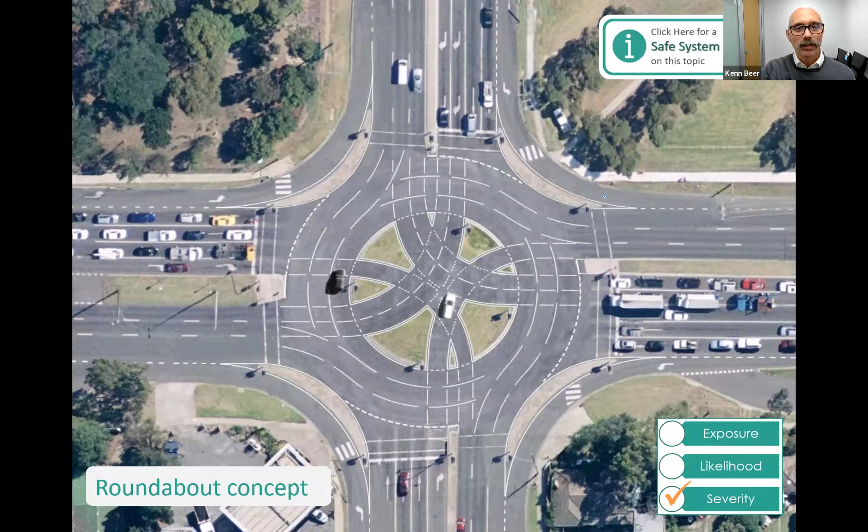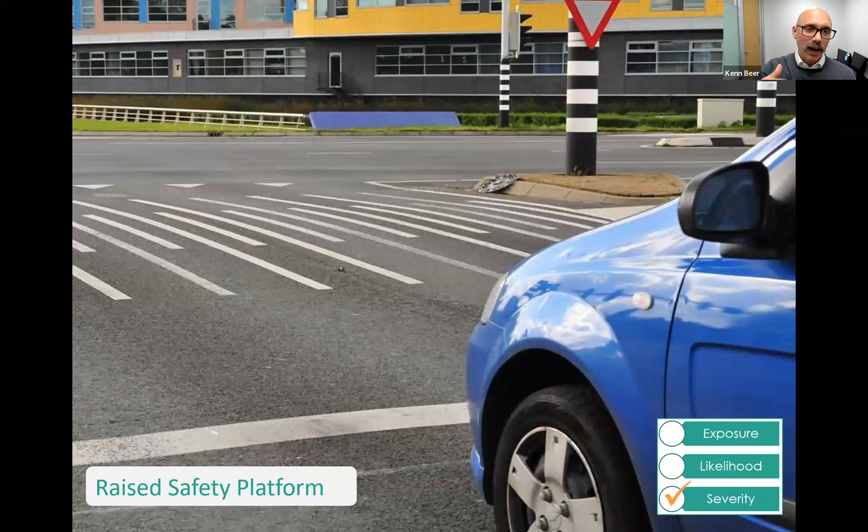It was heartwarming to see a number of you went with a raised intersection in our little exercise, because 10 years ago nobody would have done that - it would have been laughed at. But we know more now about ramp grades and how to place ramps. We saw where that region got to, because they said signals make more sense given the size constraints for a roundabout, plus unbalanced flow and a side road with much lower volume, so we'd get a weird traffic pattern at different times of day.

We also want pedestrians to have some sort of crossing point, even though there's not a huge amount of them. They landed on traffic signals, but they were finally at the point of saying, are we really just going to build one and expect better performance than the one down the road where people have been seriously injured and killed? Can we do anything else? Can we actually address severity of crashes as well? That's why they went to slowing vehicles, using these shallow ramp platforms.

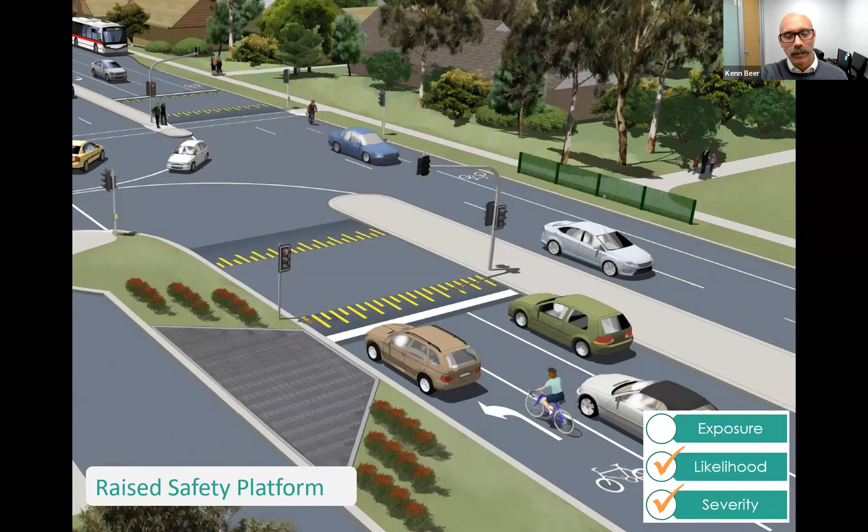You can see they're down to advisory speeds of 50. Okay, advisory speeds of 50, for a prize, why have they picked 50 of anything? Why not advisory speeds of 60 or 20, or with appropriate ramp grades, so that the steepness of the ramp you can change, which is going to elicit a different speed response. Anybody, why on earth 50?

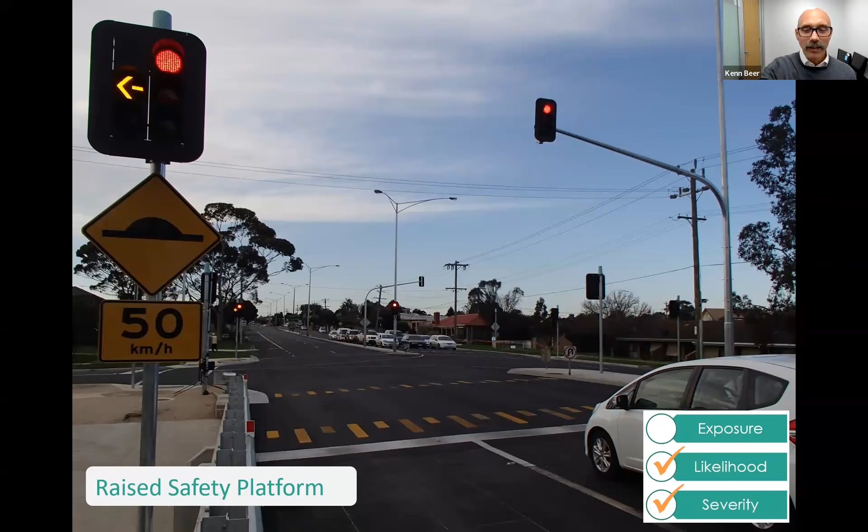Okay, kinetic energy threshold, that'll do it, Matt gets the prize - it's the kinetic energy threshold for a right angle crash. That's what you're worried about: a vehicle coming out here, being struck by a bullet vehicle, and slowing that vehicle down to a point where we think it's highly likely that everybody will survive. Admittedly, it's not getting us to our threshold speed for pedestrians crossing, and we can maybe work on that a bit. We probably need to think about a land use function and why we're mixing pedestrians with major arterials, but I think that's a pretty good outcome.

So I was out with a colleague doing the post-opening road safety audit of this, Surf Coast Kidman Avenue. I love this photo - green light, vehicle slowing down, approaching the conflict points. Beautiful.

Showing this to some people who are traffic ops people, and they were grumbling, 'Oh, I don't like it, it's so inefficient, I'm always slowing everybody down just for this risk for only a very few.' And I'm like, are you kidding me? If we put a roundabout in there, which was a genuine option, you wouldn't be complaining about everybody slowing down. It's just because this is new and different. Like that - it's just new, and people don't like change, do they?

I also like this photo because it reminds me that we actually see some benefit in dilemma zone reduction. The dilemma zone is the official traffic engineering term for the point in time and space when a vehicle is in a dilemma as to whether to put the foot down and go, or brake when the amber light has appeared. The dilemma zone significantly reduces when you put the raised platform in, because the ones who'd put the foot down have all decided, no, I'm going to stop because I have to navigate over this thing.

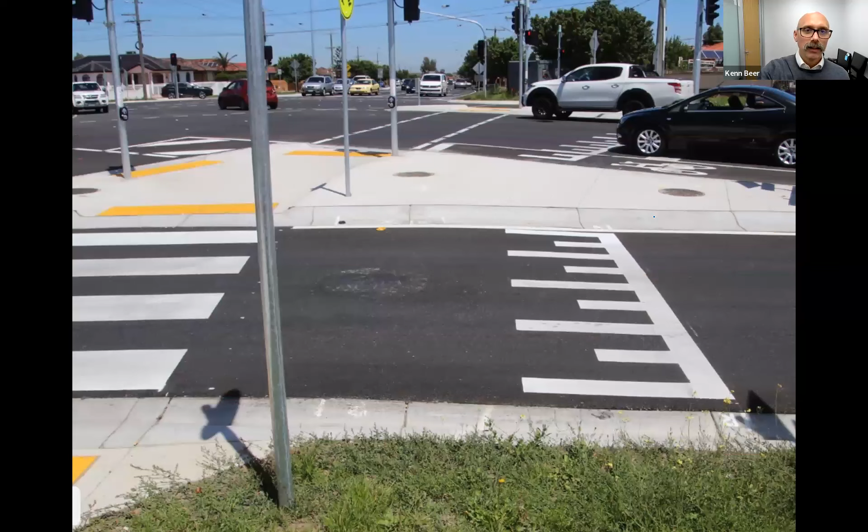It's been really good, some of the evaluations that have come out and discussions with the people managing these roads, looking at the success of raised safety platforms. We're seeing them on major roads like this one, Dalton Childs Road, and all of these ones - 55,000 vehicles a day on one leg and 25,000 vehicles a day on other bus routes, heavy vehicle routes, emergency vehicle routes. These are big roads, and raised intersections are performing really well.

None of the things people were concerned about, the big reasons you could never possibly do this - people are going to hit it and Dukes of Hazzard over, flying off into the houses, it's going to be a maintenance disaster, we're going to have flooding and rear end crashes, the noise will be unbearable, the bus passengers will be flying off their seats - none of that plays out. All that's happening is we're getting a reduced number of deaths and serious injuries compared to not having it raised, just all vehicles slowing down a bit.

There's a bit of work to be done on ramp grade construction - didn't quite get as to what you were trying, but generally we're seeing really great safety performance out of these. So really, I think if we are genuine about actually operating a signalized intersection in a safe manner, we have to look at something to reduce speed. And it's got to be something physical, like even a speed limit reduction - while that's helpful, it's not giving us the physical presence there that makes people actually slow down on the approaches.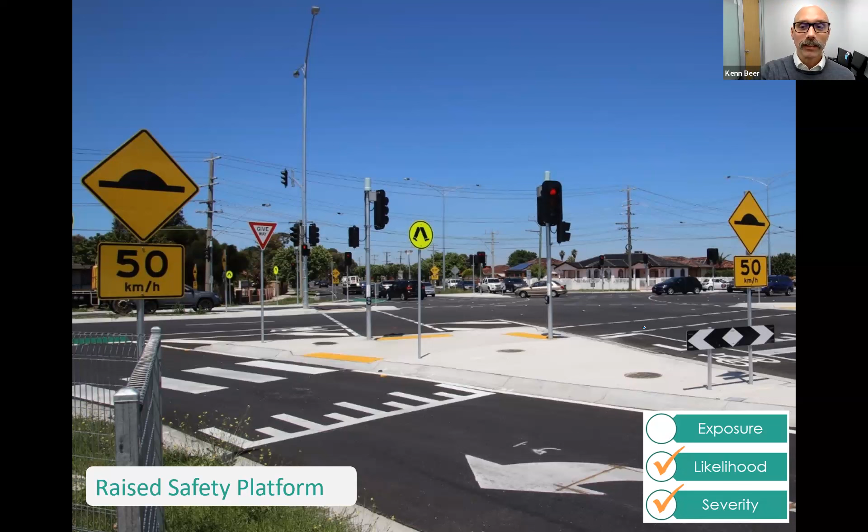So in terms of design guidance, some of you are probably aware of this. There's a good road design note, 0307, on how to do these raised safety platforms from a design perspective and some considerations. And if you're interested, there's a good Austroads document, effectiveness and implementation of raised safety platforms, with a 1-hour webinar that goes with that. Maybe, Marissa, we can even find some of these and pop them into the learning management system so people don't have to go off Googling.

And let me just show another one. Yeah, I've got time to just do this and whip through another couple of slides. So this is an intersection of two high-speed roads, and it's got the arterial road sort of going that way. And well, I suppose there's a bit of a story to it.

This is a Telstra exchange building, and it was going to cost like $1.5 million to move it, plus the land area required to get a roundabout in, which is what the preference was. So they went to a right turn lane, not even channelized, and some warning signs and other bits and pieces. That was where they were going.

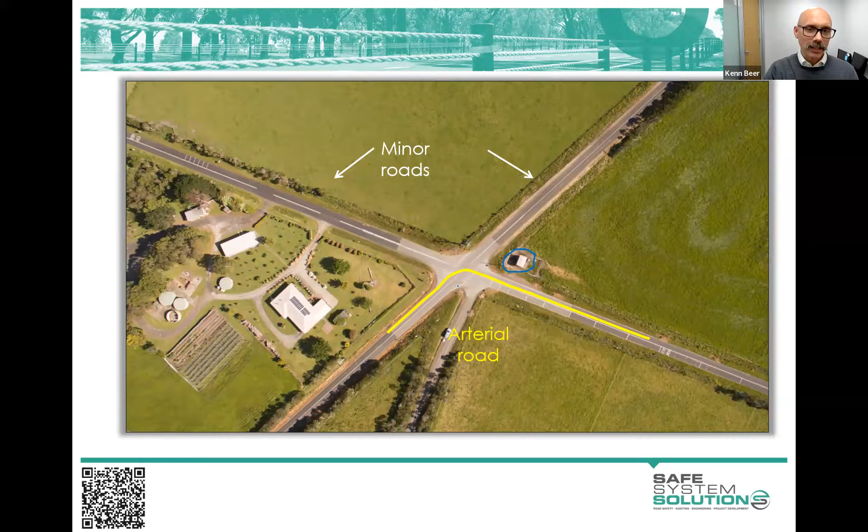But again, it was like, can we do something to actually address the severity of crashes and really fundamentally change things? So this is where they looked at this compact roundabout. This is a roundabout - the roundabout is actually just this very small bit in here. That's the roundabout, the rest of it is concrete apron.

And you can see the approaches are straight - no reverse curves on the approach, even though this is a high-speed environment. But they've used raised safety platforms or some shallow platforms out here to try to bring some of that speed down, worried about straight lines through and a bit more speed here. And then larger vehicles sort of track over this. So then we have that ability to have much lower costs.

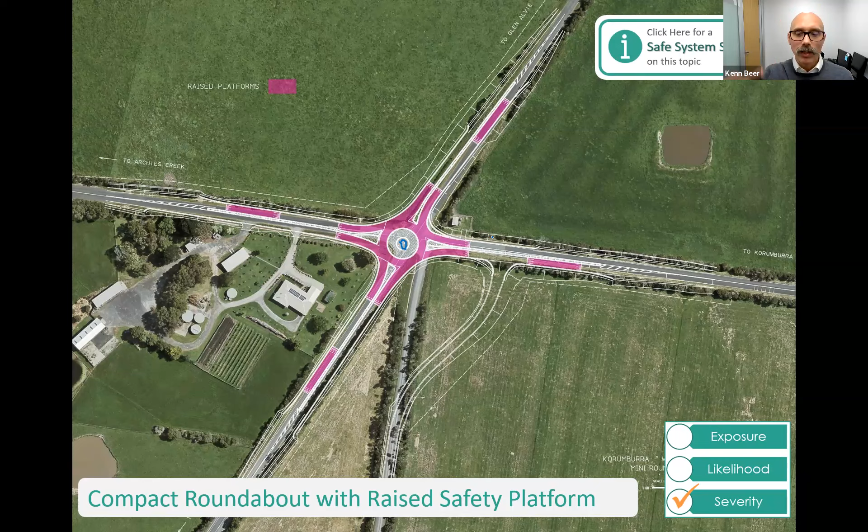This ended up being about half the cost of a roundabout that you would have to design if you followed Austroads Guide to Road Design Part 4B, which is roundabout design. And so again, we're seeing like, what can we do to push here? So I'm sure some of you have seen this one down at Lance Creek in Victoria, compact roundabout.

We've written some design guidance on compact roundabouts, which is available on the Victorian Government website. In fact, again, we might pop that into the learning management system so you don't have to dig it out. It goes through all of the complications associated with this, because there is complications - like, you can't put things in the circular part, in the roundabout, like lighting and those sort of things. You've got to think about your swept path of vehicles, where your ramps are and where the lights are positioned, and all drainage, because you've got some raised areas, and there's a lot to think about.

But again, I think if we can do this at half the cost of a normal roundabout, in fact I think you can do it much cheaper than that. I think this one, because of a whole lot of reasons, and it being the first of its kind, having to do endless stability analysis and checks and all these risk workshops and design exceptions and all of it, I think you could actually streamline this down to be even lower cost, and we could do a lot more of them.

So some questions are in there around the guidance on ramp grades for all ramps. Has the raised platform replaced the old rumble strips? Seems to have. It's more replaced your reverse curve, which is a well-proven way to start that slowing down process.

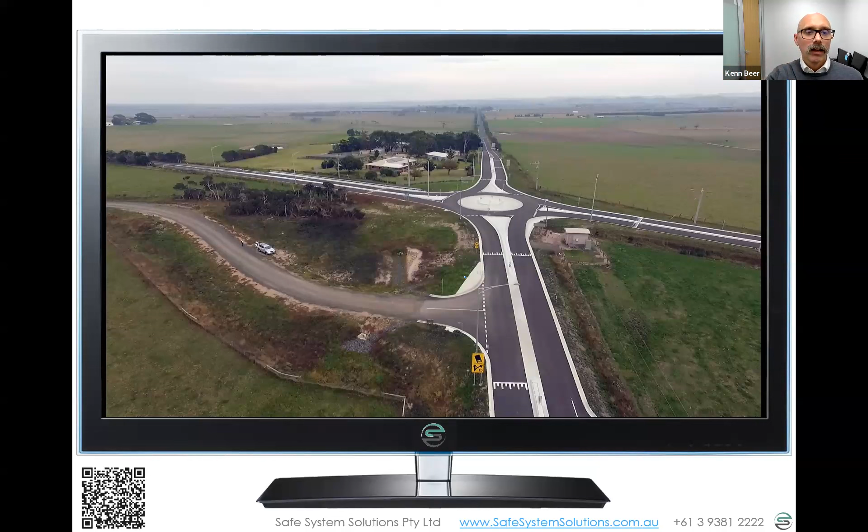Anyway, I'll keep going because I need to. I'm not going to do the quiz because I need to give you more time to actually be told what you've got to do.

So lane departure, really, I can do this quite quickly, and I need to do it quite quickly. Basically people fall asleep, they get distracted, they drop their cigarette in their lap, and whatever it is, they leave their lane. Then we're leaving them with high speed, and they leave the road, they hit trees, power poles, culverts, they hit other vehicles coming the other way.

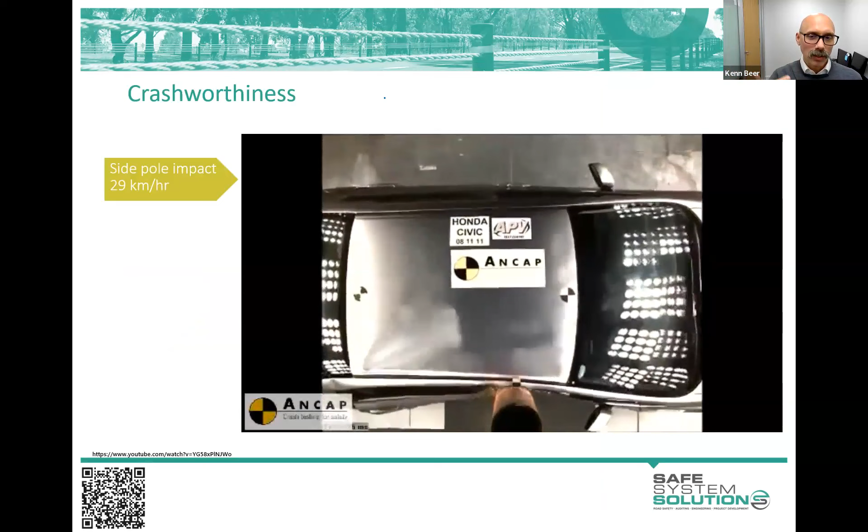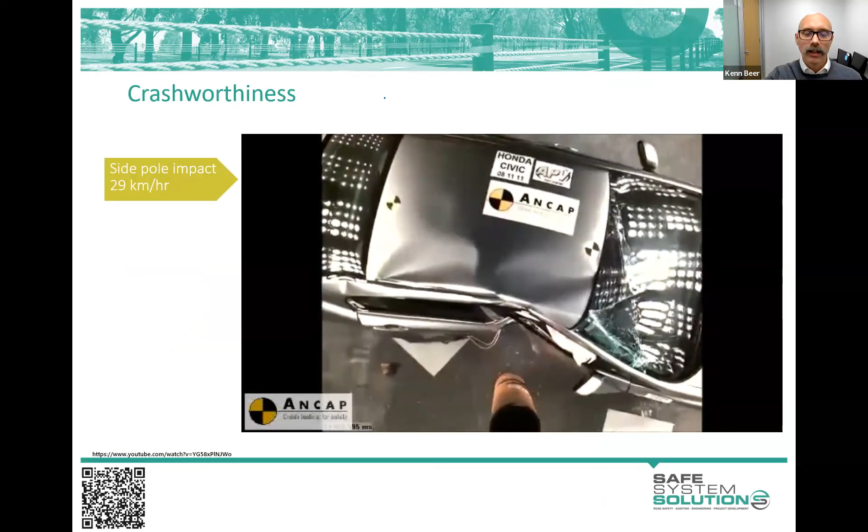Again, the risk exists along the whole of these corridors, and there's little bits of increase in risk when we have little curves and side road accesses and the like. Major access points have a big spike in risk, but we know the risk is certainly there, and we know these side impacts with point source hazards are extremely far from safe system threshold speeds. 29 km/h side impact pole test for an ANCAP 5-star rating. It's actually gone to 32 in recent years, but nonetheless, we're nowhere near that for the speeds we're seeing vehicles leave the road and hit trees.

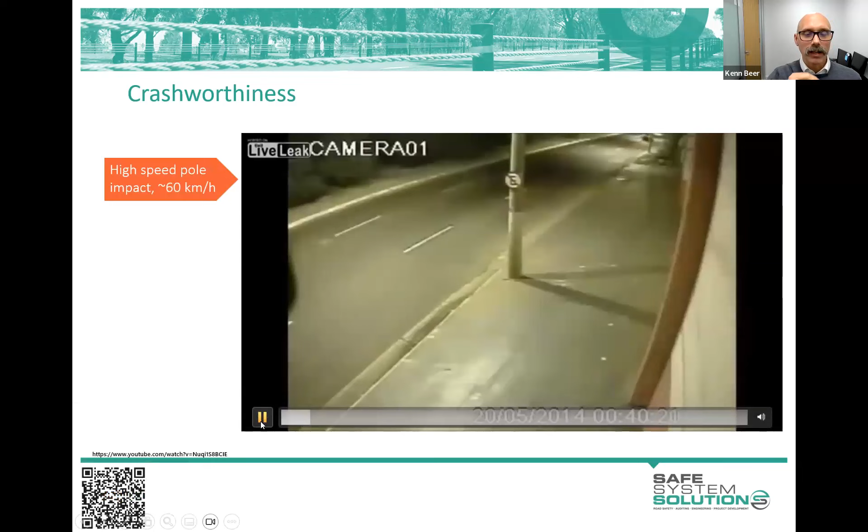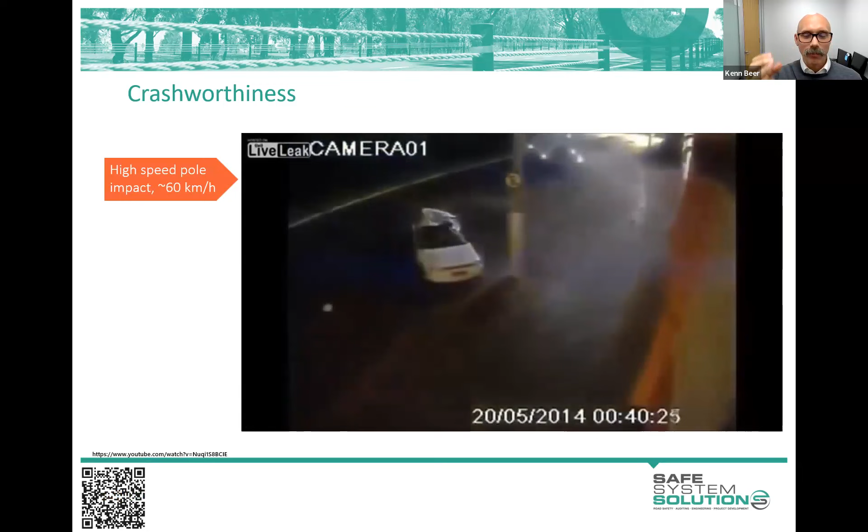Here's one that's estimated at actually more like a 60 km/h impact into a power pole. You can see the excessive violence in terms of energy transfer. It's unsurvivable. The kinetic energy formula just spits out massive amounts of energy with weight of vehicle and speed, and that's what we see.

So even clearing the roadside, getting your clear zone requirements, we know does something to reduce risk, but we know people go beyond clear zones and they find hazards, they roll over in clear zones. So we're never getting much better than about 4 casualty crashes per 100 million vehicle kilometres travelled at a risk sort of threshold.

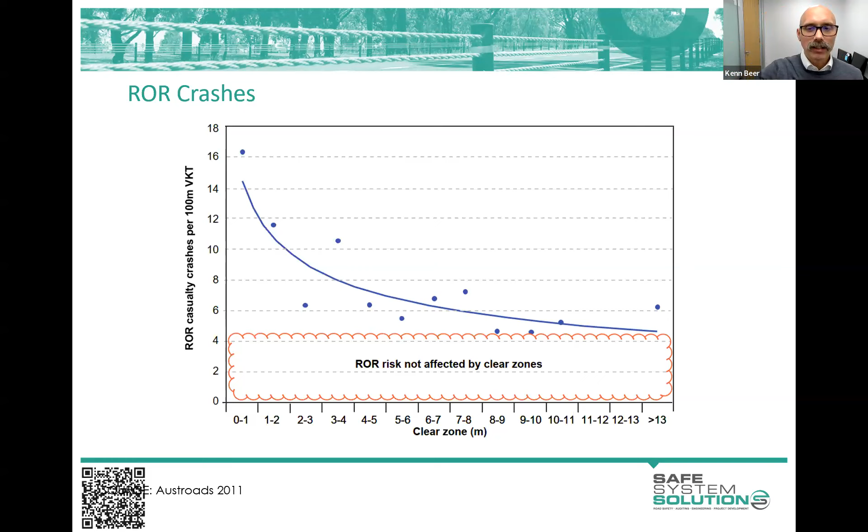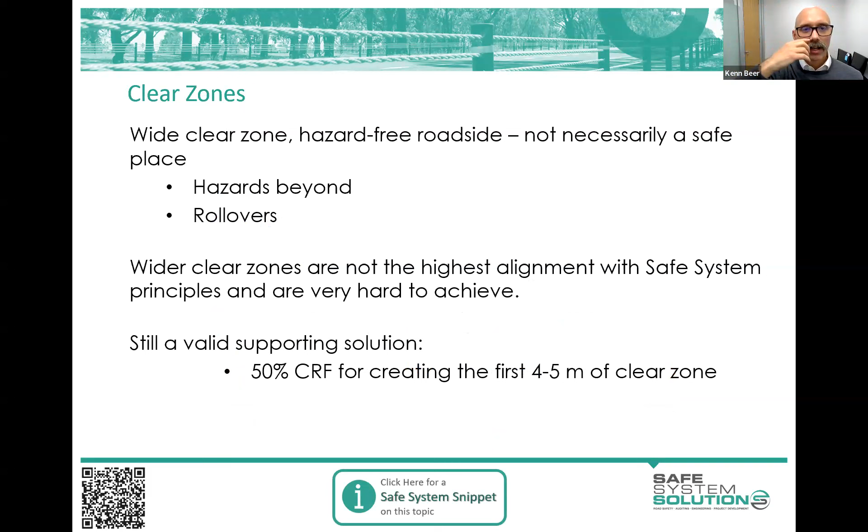So some dot points on the old clear zone way of thinking. We get our best benefit in about the first 4 to 5 meters, and then it's really asymptoted off after that. You've got to be concerned about hazards beyond and rollovers and the like.

So if it's a new bypass of a town or a duplication of a road, we're not anymore designing with a big calculated clear zone across the middle and then a calculated clear zone out to your trees. You wouldn't have these in your normal design, because we know if we build that, people are going to get across the carriageway, they're going to have head-on crashes, they're going to leave the road, they're still going to hit the trees. Happens all the time. Brand new bits of road, they're open, and then these things are happening all the time.

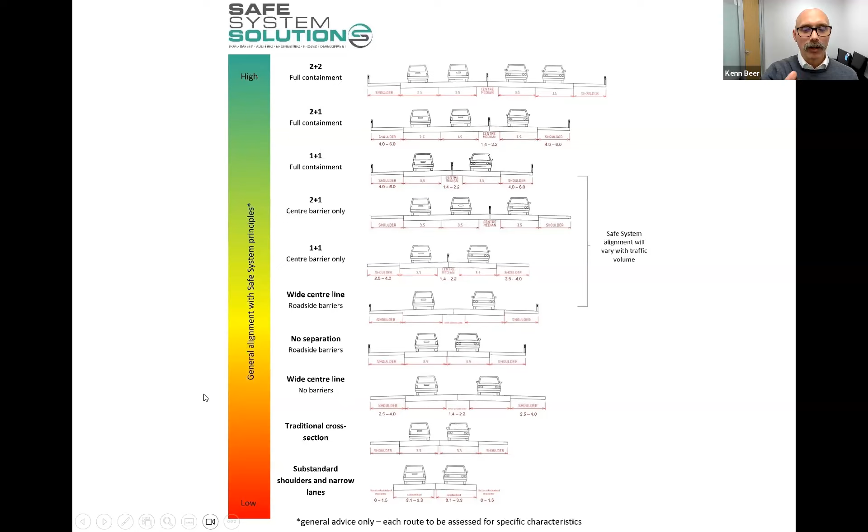I better stop there, Marissa, because I've got 7 minutes to explain what on earth they're going to do with their assignment.